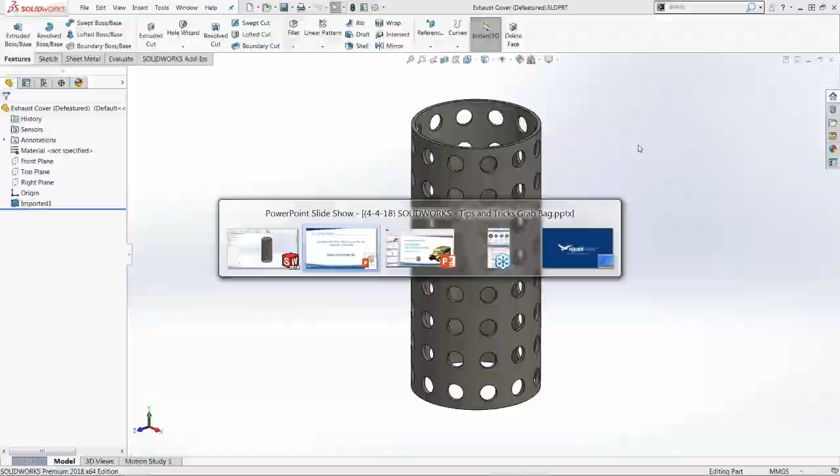Moving on, this is one of my favorite keyboard shortcuts. You can collapse your entire design tree with this clever keyboard shortcut. Some of you probably already know this. This is Shift-C, and this actually automates a command called collapse items. Especially in assemblies or very large design trees in general, you may come into a situation where you have a lot of expanded items and a very, very long design tree that you have to deal with. And what a hassle it is to have to come back through and manually close up all of those items.

If you right-click the top of the design tree, in this case the assembly icon, there's a collapse items option in the shortcut menu, and that's going to collapse your entire design tree. Quicker way to do this, in my opinion, if you like keyboard shortcuts like I do: hold Shift, press C, and that'll collapse your design tree and clean up that mess for you.

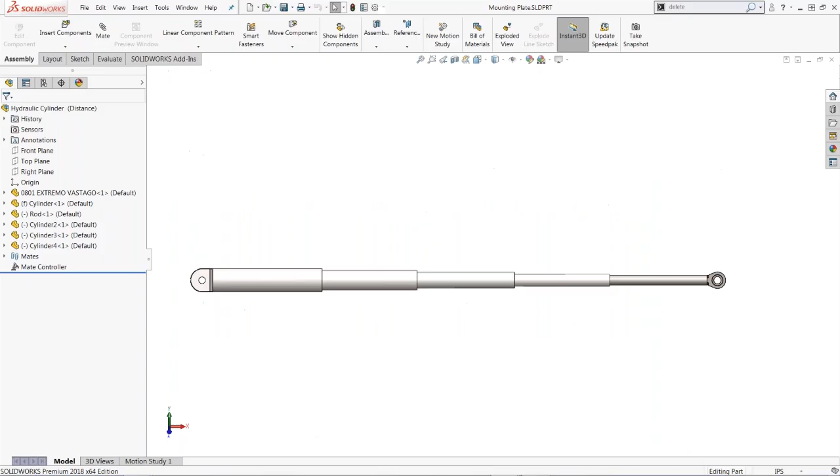Our next one, again one of my favorite shortcuts: configure to your heart's content with this powerful dialog, no Excel required. Many of you are probably already familiar with design tables. For those who don't prefer to use design tables, we have another way to do that, using the Modify Configurations dialog. Very easy to use, comes in a table format. We've got a simple example here to show how we can use this to create configurations very quickly.

Now, how do you typically create configurations? The manual way is to come over to the configuration manager, add a configuration, give it a name, and then start going through and customizing dimensions and suppressing features per configuration, which is fine if you only have a couple. But if you need multiple configurations and you need to create them very quickly, this is where the Modify Configurations dialog really comes in handy.

To access this, you can simply right-click a feature either in the design tree or the geometry in the graphics area, and rather than just modifying it, you can right-click and choose Configure Dimension or Configure Feature depending on the geometry you have selected. In this case, I've chosen to configure my 6-inch dimension there, and you can continue adding dimensions to this table. So I've got the height, we can get the width, the depth.

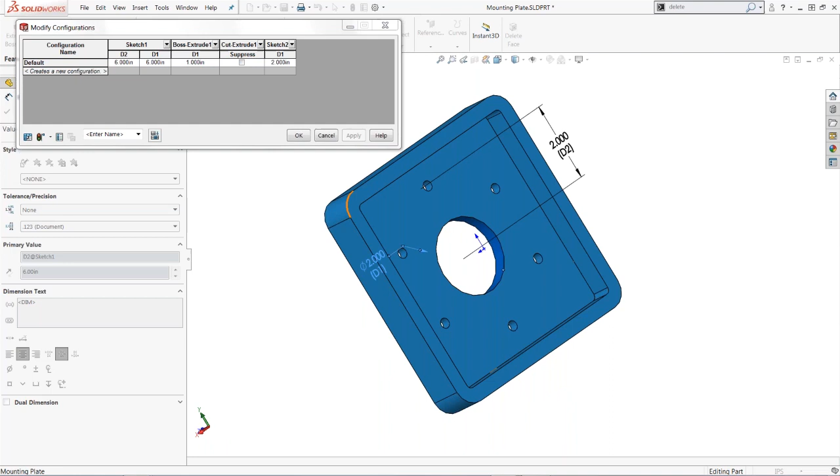You can grab additional features just by double clicking. You'll notice that comes in with a suppression state. Maybe we want to grab the size of this, we'll grab a fillet feature as well. And then you can just start configuring it.

Very easy to do. You can click where it says creates a new configuration very quickly. There's 3 additional configurations. Here's my 8x8 version with a 2-inch depth. And maybe we want to suppress, say, the fillets. We can do a 10x10. I think you get the idea here, so I won't spend a whole lot more time going through this.

Once you're done, you can click Apply. It'll generate those configurations, and you can also save this table for future reference by typing in a name and simply clicking Save. If you don't do this, this table disappears, so I always like to point this out. You can save that table view, and when I confirm, there's my number 1 configuration, a little bit larger with those fillets suppressed. Number 2, and 3, which I didn't change, so it's going to look the same as my default.

From the configuration manager, I can go to my table, double click that and open it back up and continue adding features, dimensions, and making adjustments as needed. So in my opinion, very underrated. If you're not using this and you don't like design tables, it's a really great way to create multiple configurations very quickly.

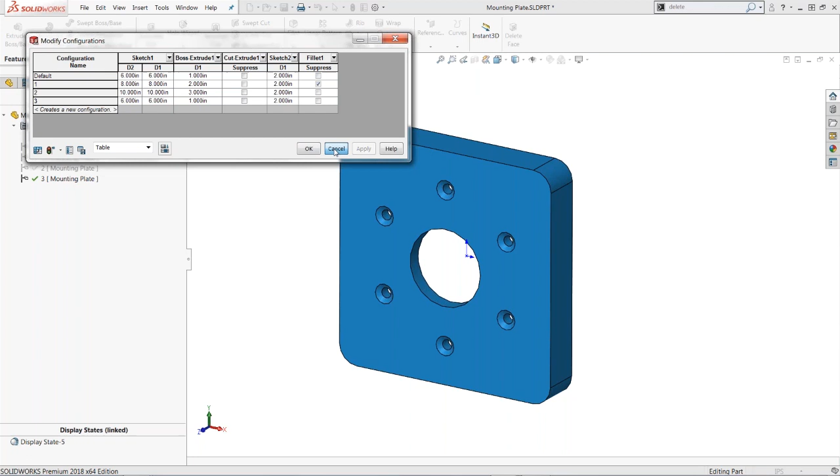If you've accidentally cleared your selections—and I think we've all done this—you go through all the trouble of making pre-selections, then you click in white space and clear your cursor.

You can bring them back with this context menu shortcut, known as Previous Selection, though there aren't many different ways to find it. As an example, if I make several selections here, maybe selecting a variety of faces and edges, getting ready to run a command, and say I've done this 50 times and accidentally click in white space—what do you do? Fortunately, if you right-click in the graphics area, in the context menu there's an icon called Previous Selection.

I've yet to find this command anywhere else. I'm not sure if it can be added to the command manager—I haven't been able to find it. But for all of you listeners out there, if anybody knows of another way to access this, please let me know. You can send us a question and let us know where to find this. As soon as I click this button, all of my selections are back, and you don't have to panic.

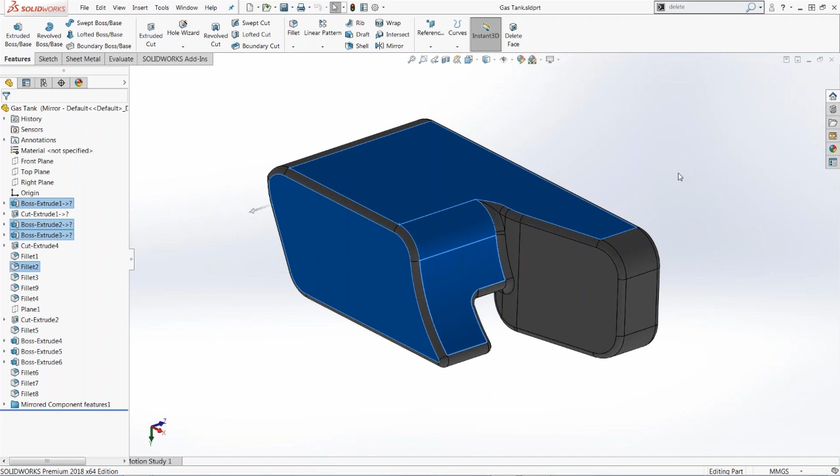So that's the previous selection tool that has saved me a lot of time through using it.

Last but not least, for our shortcuts, if you're tired of closing open files one by one, and you work with a lot of files at the same time like I do, you can close them all at once with this window command, known as Close All. In fact, I use this one so much I went ahead and assigned it to a hotkey.

Right now, if you take a quick look, I've got four documents open, and every time I click X, it's going to ask me if I want to save it—I'd have to do this four times. Instead, I can go right up to the Window dropdown and choose Close All, which I've assigned to a hotkey, and close them all down, that's it. It may come up with a dialog asking if you want to save, but it's only going to be one dialog, and you can take care of all of these at the same time.

So those are our time-saving shortcuts. That's going to take us into productivity settings—again, settings, whether system options or document properties, that I like to change with respect to what the default settings are for SolidWorks.

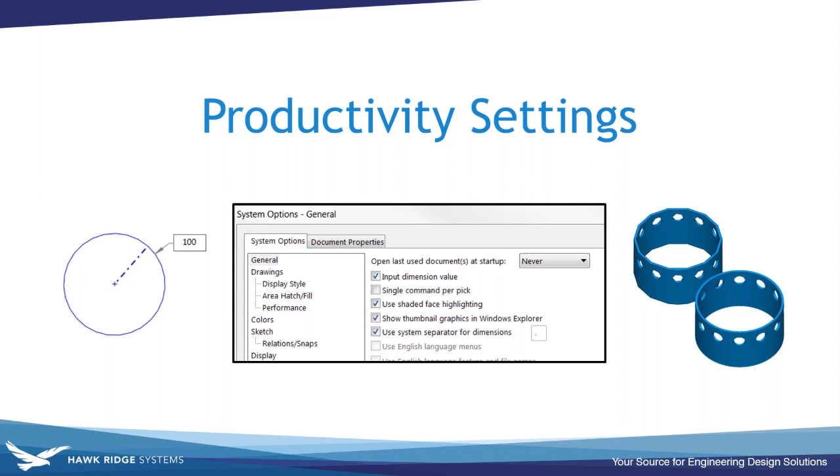Again, we have a couple hints on the screen here—we'll get right into the first one. You can enable this setting to add dimensions on the fly while creating sketches. Instead of having to go back every single time and grab your Smart Dimension tool, you can enable on-screen numeric input for your sketches in order to create those dimensions on the fly. Let's go take a look at this.

I'm in a sketch right now. If I go to create a circle, for example, I get a number attached to my cursor—everybody should be able to see that. But remember, this isn't a dimension, it's just the current value for this circle. So if I wanted to dimension this and fully define it, I'd have to come back, grab my Smart Dimension tool, apply the dimension, insert the value, and then confirm it. And that's kind of a pain.

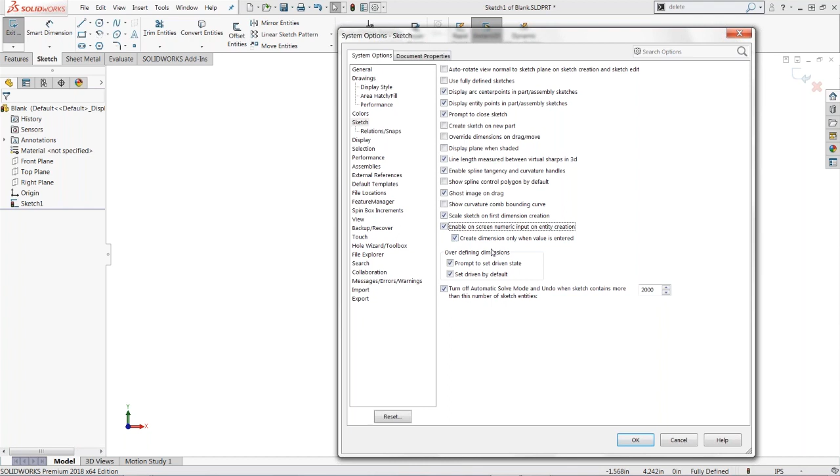So what I like to do is come up to my system options, go to the Sketch category, and look for 'enable on-screen numeric input on entity creation.' This gives you a little input box so you can add a value directly and apply a dimension automatically. If you're using this, you probably also want to make sure the sub-option 'create dimension only when value is entered' is enabled, otherwise you're going to be creating dimensions for everything, which isn't necessarily what you want.

With that enabled, when I go back and create my circle, notice I get my input box. I can just type in a value, press enter, and it assigns the dimension for me automatically, and we're fully defined there. So that's one of my very favorites, and I definitely wanted to share that one with you.

Moving on, you can enable this tool, there's a hint there for you, in order to prevent specified features from rebuilding. Some of you may have heard this. This is known as the freeze bar, and what it effectively does is it locks features and prevents them from being rebuilt. Now, when I say it locks features, you can always unlock them.

It doesn't prevent somebody from coming in and undoing that process, but it's a nice little tool. You'll notice it's taken me a little bit to load this file up, and that is actually intentional. What I have here is a wheel, and it's got a nice tread pattern on it, but that tread pattern takes a very long time to rebuild. In fact, if I go to my Evaluate tab here and check Performance Evaluation, our total rebuild time for this is nearly 45 seconds, and that's not something we want to deal with.

Now, assuming the rest of the work I'm going to be doing is with respect to something other than that tread pattern, I can come up to System Options, and in the General category, near the middle of the screen, you'll see Enable Freeze Bar. When I check this on and click OK, you'll find a yellow bar at the top of your Feature Manager design tree. Unlike the rollback bar, this one starts at the top and allows you to drag it down. And again, this is going to lock features.

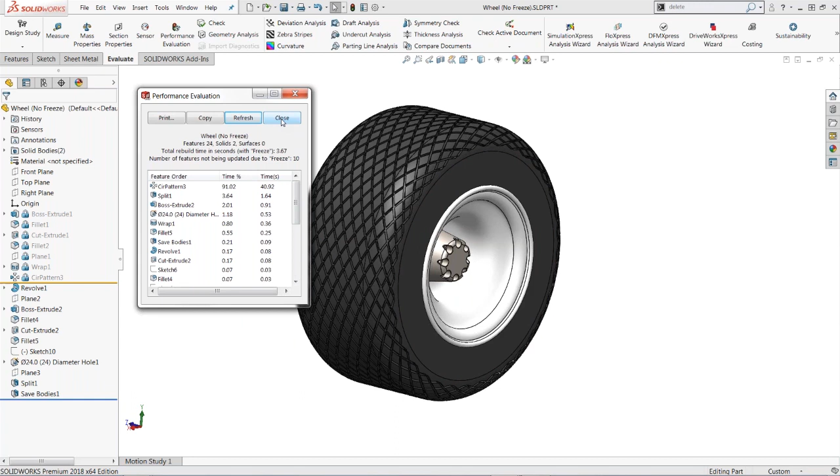Use this category of system options to add custom template folders, especially for you newer users out there. You need to be familiar with this. This is known as file locations. In this example, I'm going to take the simplest example of adding templates, but the truth is you can add a lot of other information using file locations.

If I start a new document right now, notice I have several tabs for templates. By default, you're probably only going to get 2 or 3 tabs here. But if you want to add new custom templates, you can use file locations. This is stored in system options as well, and you'll find file locations, a category about in the center of the list there.

By default, it's going to show you folders for document templates. But a quick look at this dropdown shows we have a ton of different types of items that we can add so the system can reference them properly. Things like weldment profiles, textures, thread profiles, you name it, it's probably in here. So in this case, I want to add a folder for document templates.

I'm going to go right to my file set here. The name of the folder that you add is going to be reflected in the new tab that gets created. So I'll choose my test templates and click OK.

One other thing, when you see this dialog, you're going to reflexively want to click yes. You don't actually have to do this. This just adds a search path so you can search for those documents later. And if you click no, it's still going to work. So you can go ahead and click no there.

Now when I go to create a new document, you'll notice my tab for test templates carrying over that folder name, and there they are. So this is the easiest way to add new templates and allow you to store all those document settings so you've got the proper standards and everything else you need.

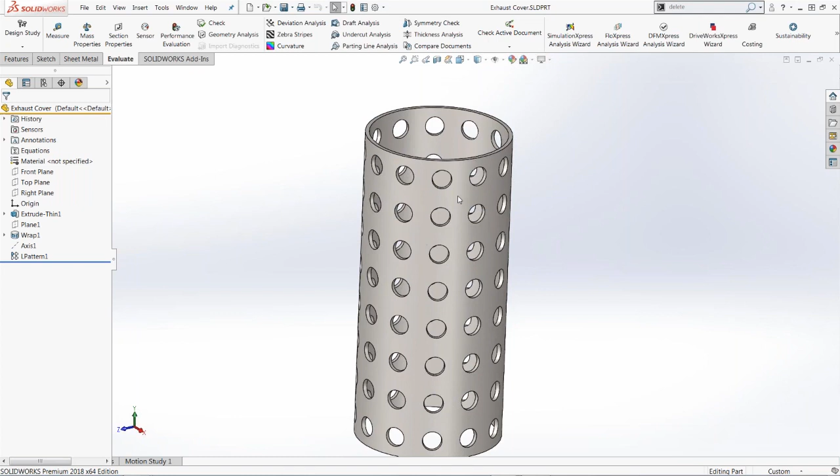We saw this in the very beginning, and right now you can see the fidelity of these edges is pretty nice, but let's say you're working on a slower PC, or you're getting some graphical issues. When you go to rotate this, it's kind of choppy, right? What you can do is, rather than system options, go to document properties. We have an image quality category, and we've got two sliders here, one for draft quality, one for high quality, for hidden lines removed and hidden lines visible.

If I reduce this, what you'll find when I click OK is that we're going to get some wacky looking edges there. Now these don't look very precise. Obviously you don't really want to work in this extreme of a case, but if you have a very slow PC, if you need faster graphical performance, you can reduce that slider. Maybe not quite this much, but that will improve your graphical performance quite a bit.

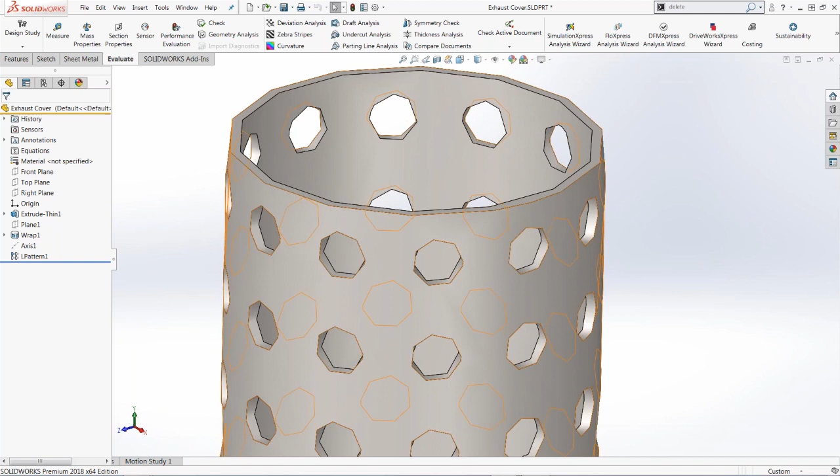And again, that can be saved in a template. So if you want to reduce that, you can. And again, that's image quality.

And then finally, for productivity settings, this 2017 option allows for the import of non-SOLIDWORKS files without translation. That without translation, that's the big deal here. This was introduced a couple years ago. It's called 3D Interconnect, and if you want to take advantage of it, you do have to make sure that it's enabled.

So this is just going to take a second. We've got a big assembly that we're going to load up here. And we're going to show how we can take, in this case, I used a step file, but you can also use CATIA, you can use Creo, we can use lots of third-party documents, and we can bring them in without the hassle of translation, which oftentimes, unfortunately, results in errors.

So I've got an assembly here, and I want to bring in a hydraulic cylinder to add underneath this truck bed here. And if I go to Insert Components, and I browse out, when you're doing this, by the way, make sure that you're not set to just SOLIDWORKS files down here in the bottom right. We want to make sure to set this to all files.

I'm looking for my hydraulic cylinder, and we're going to use the step file. And when I open this, it's just going to read it. And the coolest part about this is that if the model is updated in whatever program it was initially created, it can be updated here as well.

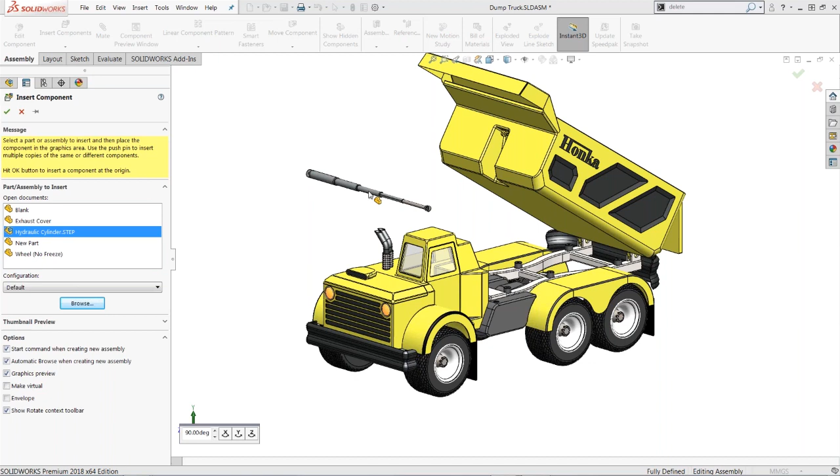There's a ton of documentation on 3D Interconnect. I'm not going to get into it too much here, but notice no translation. If you have a look in the Feature Manager design tree, there's a green arrow superimposed over the icon there. And that's what allows for a link back to the original program. All right, so just something I wanted to cover there.

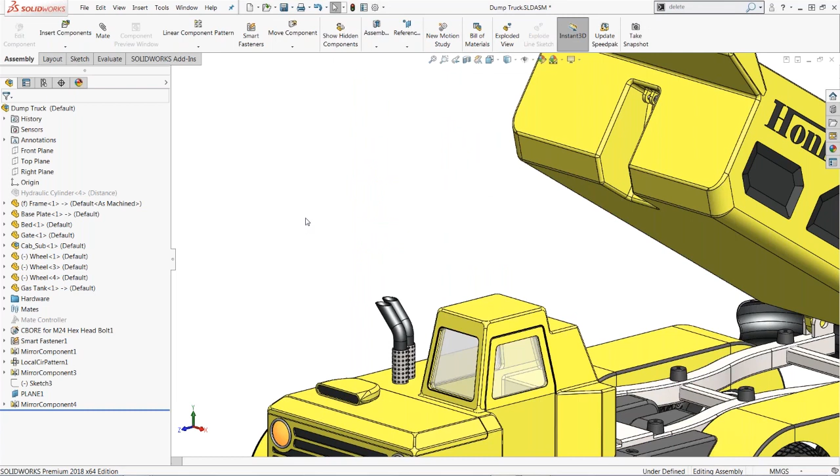In order to use 3D Interconnect, you do need to make sure that your options are set properly. In System Options, in the Import category near the bottom, you're going to find at the very top an option for Enable 3D Interconnect. You want to make sure that's turned on. And likewise, if you don't want to use 3D Interconnect, if you need that translation, you want to disable that. And this works for opening parts in assemblies or parts on their own as well.

All right, moving on to the next category, we've got power tools and utilities. Some of my favorite tools and SOLIDWORKS utilities that I consider to be relatively underused. Again, some hints on the screen here. The first one that we're going to take a look at, this is an assembly command. It's, I guess, technically an evaluation command, but it's used for assemblies.

And this color codes components to show mass, rebuild time, cost, you name it. There's a lot of different parameters that we can color code our assemblies by. Some of you will probably recognize this. This is assembly visualization. This is a really nice evaluation command that can do a lot of different things.

So from the Evaluate tab, we'll go to Assembly Visualization. By default, it's going to color code this according to mass. So we can immediately tell that our cab here is going to be the heaviest, closely followed by the frame, then the bed, and we can see that things like the base or the plate back here and some of these other subcomponents don't have nearly that much mass.

Now, you can change colors. You can move the sliders to make some adjustments there. But what I want to focus on here is the ability to show other categories. You can show things like density, volume, surface area, etc. But if you click more on that right-hand arrow, you can select from a variety of other properties.

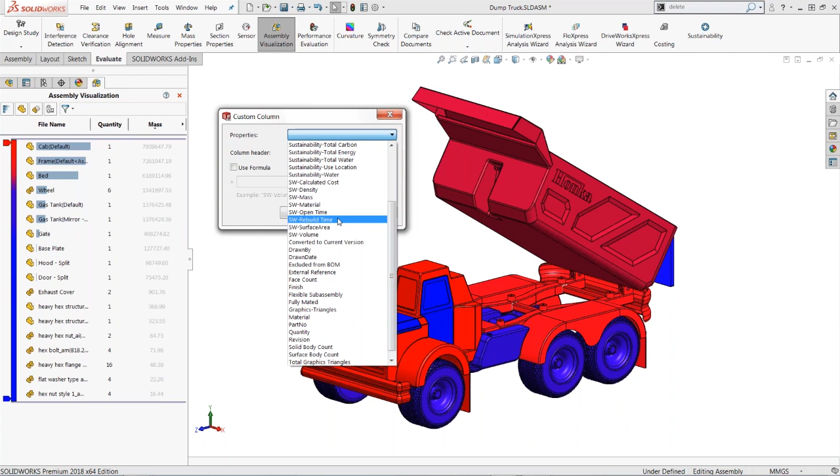Lots of sustainability options if any of you are doing sustainability analyses. But we also have things like open and rebuild time, in addition to things like whether your components have external references, whether they're fully mated, or if they have a high graphics triangle count. We can check out all of these, but the reason I emphasize open and rebuild time is because these can help you identify components that are slowing down the opening or the rebuilding of your assemblies.

So if we show rebuild time and I click OK, notice most of these things are actually not too bad, but those wheels, which we had to look at earlier, again, because I don't have those features frozen or suppressed, that's taken 44 seconds every time we want to rebuild it. So definitely a really valuable tool, helps you spot issues and inefficiency within your assemblies, and a very important tool to have in your tool belt there.

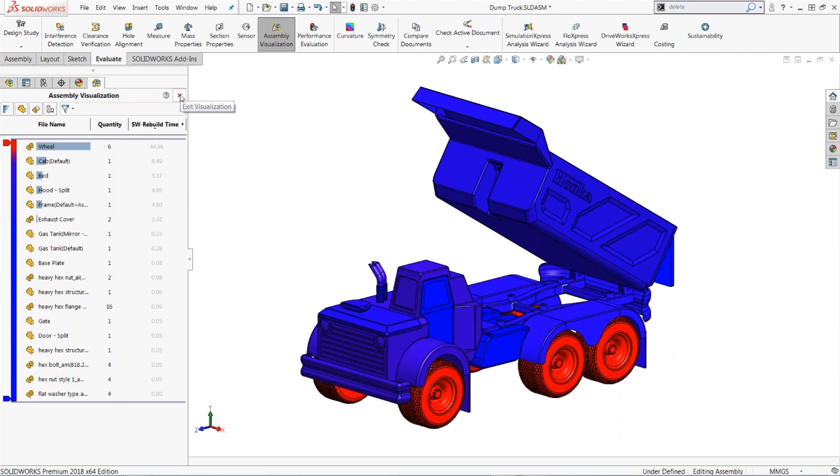All right, let's go ahead and close these down. We're going to move on to another section here using that close all command again. And you can use this tool to move, rotate, or scale an entire sketch even if it's underdefined. Again, very underrated. This is the modify sketch command. How many times have you tried to make an adjustment to a sketch or translate it only to find that it's partially underdefined and you end up messing up the sketch? That's what modify sketch is really good for.

To show this as an example, I'm going to make a quick copy of an existing sketch, put it onto our other plane here. We're going to go edit that sketch, and then from tools, we can go down to sketch tools, and here you'll find modify. Again, this might be a good example of where you could search for a command if you don't know where this lives. I'll click modify. We get a little dialog here.

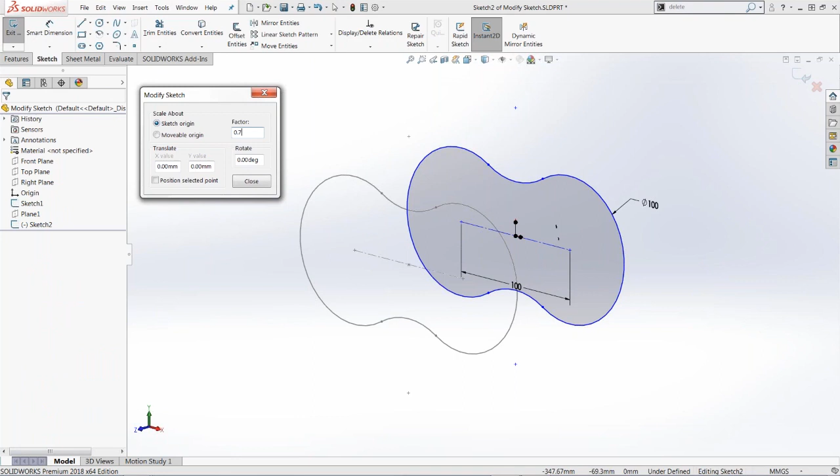We can scale it. So if I want to change the scale, for example, 0.75, make it a little bit smaller. We can rotate it. We can translate it. And keep in mind, this is an underdefined sketch. If I just tried to click and drag this, we'd run into all sorts of problems. So modify sketch, super valuable. And just to finish this off, why don't we make a quick loft for fun? We'll do something like that. All right, so very easy to use, very valuable.

Next up, this 2011 tool removes details from assemblies and parts, and this does include multi-bodies as well. This is known as the Defeature tool. Very useful for simplifying models to be used in assemblies, so you do have faster rebuild times and better performance, but it's also good for protecting things like intellectual property. So if I wanted to send this to someone, maybe to fit another component to it, but I didn't want them to see the bolt pattern for whatever reason, the Defeature tool can help here.

So from Tools, near the top, you'll find Defeature. This is going to end up splitting your screen, but for right now, it's just asking me what features I want to keep. So it's a multi-page dialog. You've got to make sure to click the next button. Choose features that are critical. You can select all holes, etc. When you're ready, go ahead and click Next.

This is where you'll see my screen split in half. It's going to show me the original on the left and the simplified version on the right. And you'll see in this case, it's gotten rid of all of those holes, all those extra details, because we probably don't need to see this in an assembly. All right, so we have a couple options here. You can identify additional items to be removed, or in this case, you can skip that. In some cases, if you're doing this at the assembly level and need to retain motion, you can identify information that needs to be kept for that.

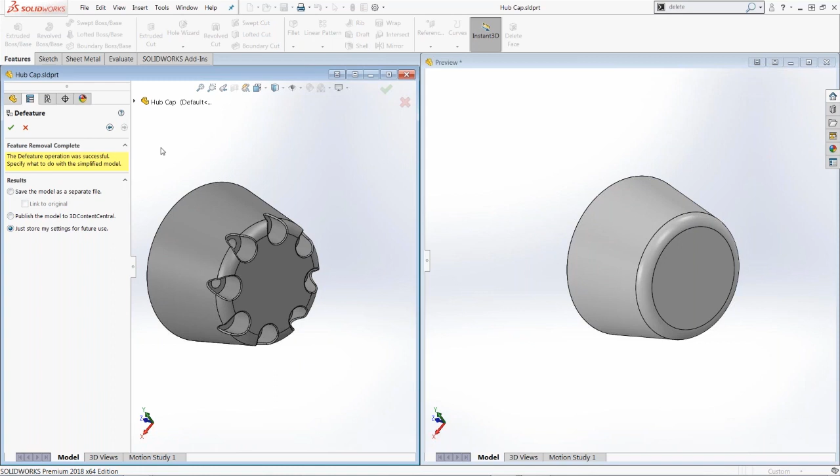And ultimately, when you're done, you have a couple different options. You can store the settings for future use. If you want to just use this later on, you can save this model as a separate file. This is typically what we do. And when you save this as a separate file, you can also choose to link that to the original. That way it actually maintains a link between those two documents. I'm not going to do that here, but you can see what our end result would look like. And of course, this would perform quite a bit better in the context of an assembly. So that is the Defeature command.

Next up, you can quickly locate small faces and short or sharp edges with this SOLIDWORKS utility. This one's kind of hidden. I don't see this being used a lot, and I really feel like it should be. This is known as geometry analysis. And it does exactly what I just mentioned there. It's going to allow you to quickly identify faces and edges that are small, and this is typically an issue

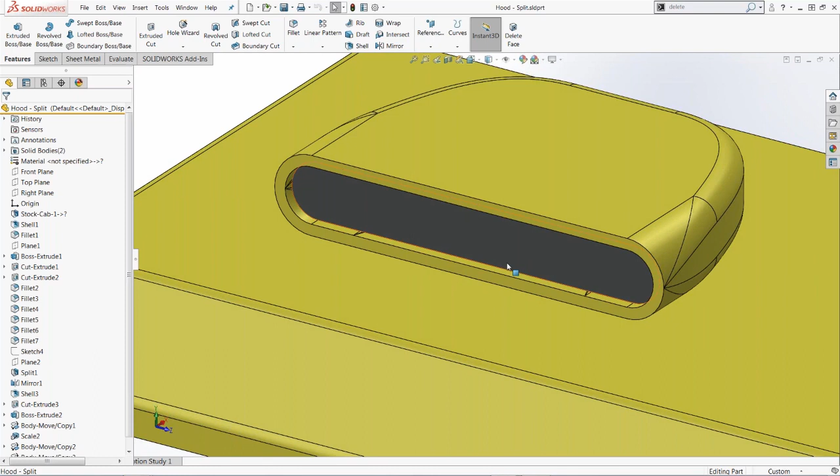for manufacturing. Now, if I zoom into this hood that we have here, there are quite a few that you can spot, but there are going to be some that are hidden as well. So in order to make this easier, from the Evaluate tab, choose Geometry Analysis. Here you would set your parameters to identify what constitutes a small face or a small edge. Once you have those set, simply click Calculate.

It's going to go through all your geometry, and it's going to find all those edges, faces, and vertices that could end up being an issue of some sort. So for short edges, it looks like I have a couple. If I rotate this around, yeah, that's a short edge. That's going to be kind of a problem there. All right, if anything, it's going to make modeling a little bit more difficult.

We can go look for some sliver faces. There's another example. If I zoom in here, and of course those callouts are going to draw you right to them, so you don't have to go searching. I find this ends up happening most commonly when you combine separate multi-bodies into a single body, but it can really happen anywhere. And we've got a couple other pieces here too that we may be concerned with.

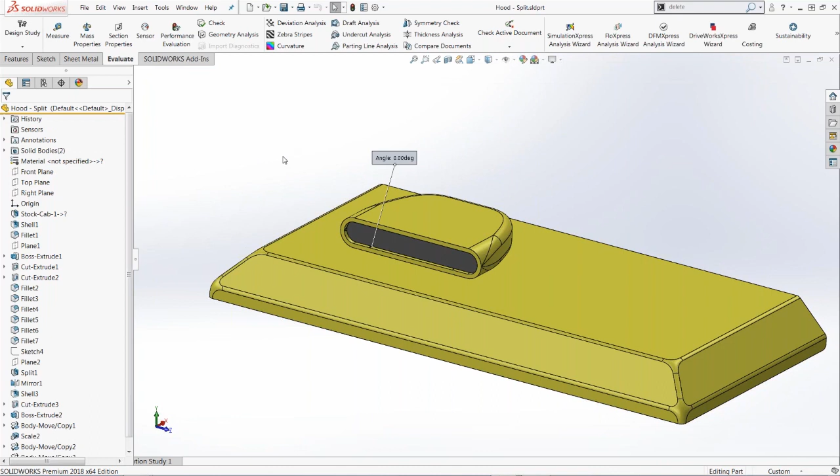So that's geometry analysis. Again, kind of underused, and I think it goes a long way to helping you identify areas in your models that may be somewhat of an issue.

Moving forward, you can use this tool to create a continuous spline from lines and arcs. Smooth out those transitions. A lot of times I see people struggling with transitions, and that's where the fit spline command can really come in handy. So let's take a look at this. We're back to our wheel. This is my simplified version, so it loads a little bit more quickly. And notice all the edges that we have in the wheel.

Now these are tangent edges, so they're technically continuous, yes, but they're not curvature continuous. And you can see this if you have a look at the curvature evaluation tool. You can see they're very distinct colors. There's no real transition between them. And in some cases, especially with consumer products, this can be an issue. So one way we like to take care of this is through the use of a fit spline.

If I go find sketch 6 here, which controls all of that internal geometry, and I edit this, I just went normal to it there real quick. We can take all of this analytical geometry, that being our lines, our arcs, and we can create a fit spline from this. From the Tools drop down, you want to look in Spline Tools specifically, and you'll see I don't have any splines in this sketch yet, so I don't have any other sketch spline tools to work with, but I do have a fit spline.

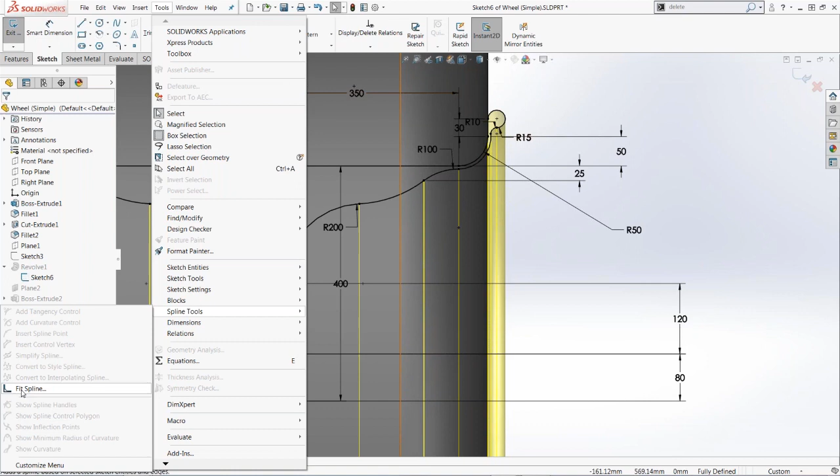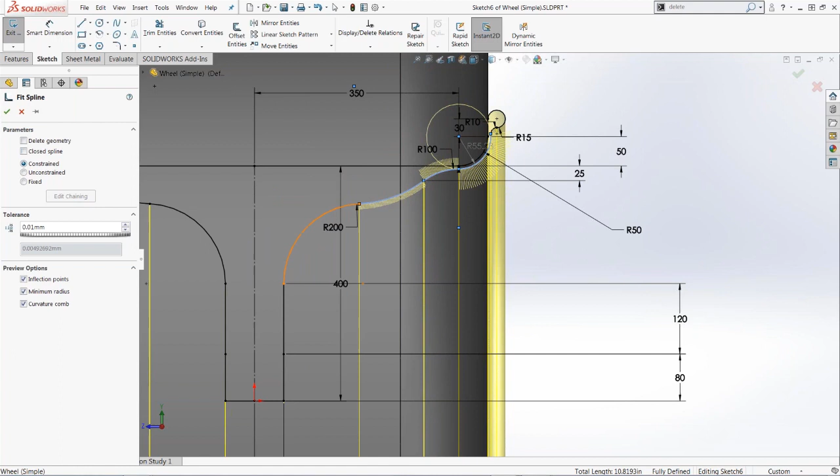Now this is kind of an interesting command. It doesn't have any window for you to input selections, so you just have to trust that it's keeping track of those. And I'm just going to start making my selections. Now you'll see kind of a weird pink line there on the screen. It's by default going to try to create a closed spline more than likely. In our case, we don't need that to be closed. We can keep it open. And we're just going to choose a few additional pieces here.

You can choose whether it's constrained to the original geometry. Do you want to delete the original geometry? I prefer to keep the original geometry in case I ever need to change it. But if you wanted to delete it, you could. You can adjust your tolerance. And once you find a fit that you like, go ahead and click OK, and it's going to replace all those lines and arcs with one nice continuous spline.

And what this ultimately results in is nice, smooth, blended curvature. And if we investigate that again through the use of our curvature analysis, you can now see gradients in the colors. All right, so a nice smooth transition that we don't get if we just have tangency between lines and arcs. So that is your fit spline command. Definitely a good one to be aware of.

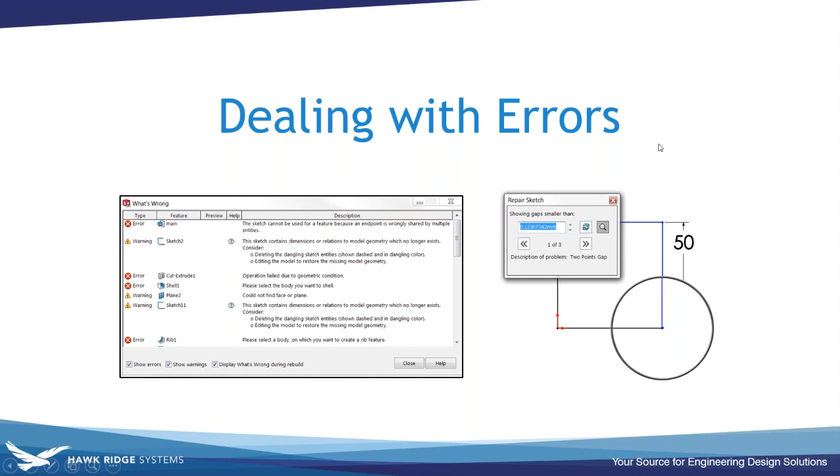All right, moving on, we are going to address dealing with errors, something that everybody has had to deal with at one time or another. This is going to be a fairly basic overview of some tips and tricks, especially valuable to you newer users out there. We're going to start off by learning where to resolve errors in a part.

You want to start with this feature in the design tree. All right, and this is just the very first one. Whichever one comes first in the design tree, that's where you want to start. And right now, you can see when I open up this part, there's nothing on the screen. There's no geometry whatsoever because we have so many errors.

Now think about this. If I try to come to the bottom of the tree, which is where a lot of people like to try to start fixing errors, what feature do I have here? I have a fillet, right? That fillet has to be applied to some sort of existing geometry. So if I try to fix the fillet first, there's no way that that can happen. You need to start at the very top of the tree, right below the origin. Whatever feature has an error first, that's where you want to start.

All right, and then moving on from here, this dialog becomes very important. This provides warning and error information for either a specific feature, or it can give you information for an entire file. This is the What's Wrong dialog. The reason I bring this up, everybody's probably seen it, but it's very easy to just dismiss. If I right click the top level part here, from the shortcut menu, I have What's Wrong. If you do this at the top level, you're going to get information for every error and warning in the entire part.

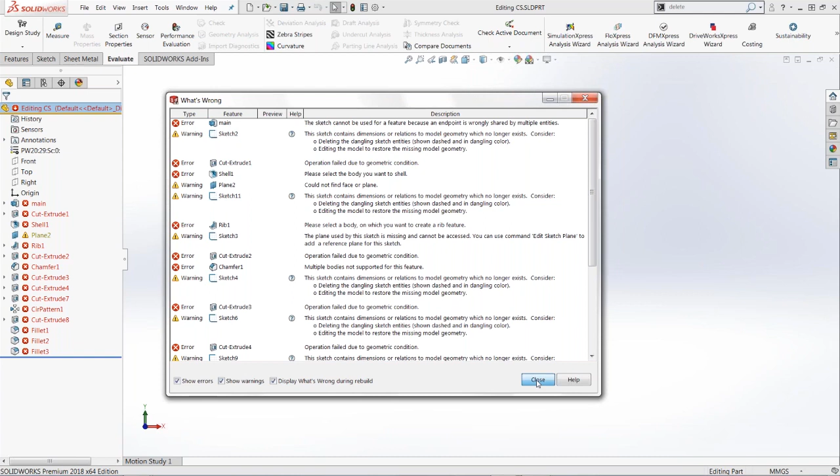And again, this is a lot of information. We can take this a step at a time, but it's important to understand what's going on here. It's easy to just click close and try to fix it yourself, but I can immediately see with the very first feature that this sketch can't be used. So I know just by looking at this What's Wrong dialog, there might not be anything wrong with that main feature. It looks like it's actually going to be an issue with the sketch. You can also get this when you rebuild. Sometimes you'll see that come up.

And if you want to see what's wrong for individual features, you can just hover over them in the design tree, or you can right click and choose What's Wrong. And it's going to give you a good description and help you understand where to start. So that's the What's Wrong dialog.

And then building off of that, this tool allows you to check for what I call micro lines, extremely small lines, and tiny gaps within a sketch. This is one of the most common errors that we have to deal with, is very small accidental lines, little gaps that create discontinuity and prevent you from creating your feature or result in errors. This is the Repair Sketch tool.

So coming back to our same issue here, if I want to get started fixing this, we already know from our What's Wrong dialog that there's an issue with the sketch of the main feature. So if we go to edit this, I don't really see anything wrong with this. And that's the problem. These are very difficult to identify just by looking. So that's where the Repair Sketch tool really comes in handy.

From Tools, if we go to Sketch Tools, we have a Repair Sketch command. And as soon as I do this, we're going to get a little dialog that's going to provide us with a magnifying glass and allow us to search for those errors. So you can set this to show gaps smaller than a certain threshold. And then I can zoom in with just this little magnifying glass, and you can see this tiny little issue is enough for our entire feature to fail.

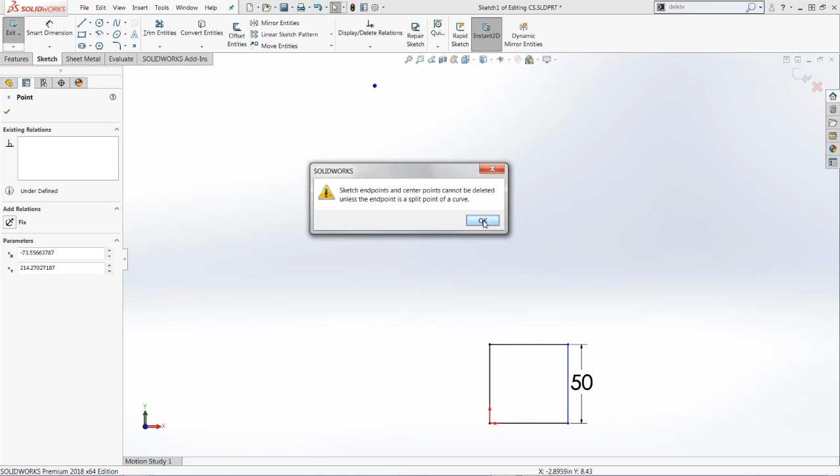I'm going to zoom into this. Hopefully everybody can see this okay. And when I get in close enough, what do we have here but the world's smallest line? If you're zoomed out, you're going to end up clicking an endpoint which can't be deleted. But when you zoom in close enough, or if you do a box select, for example, over that, you can delete it no problem. All right, and that's going to take care of that issue for us.

If we want, we can throw on an equal relation here to fully define that. And we do have other errors, which I would typically recommend stopping and repairing. You'll get another what's wrong dialog, but you can see that that first feature now has no issues. All right, the warning symbol is gone, and that repair sketch tool is a really great way to identify those issues at the sketch level, which are often the cause of your features failing.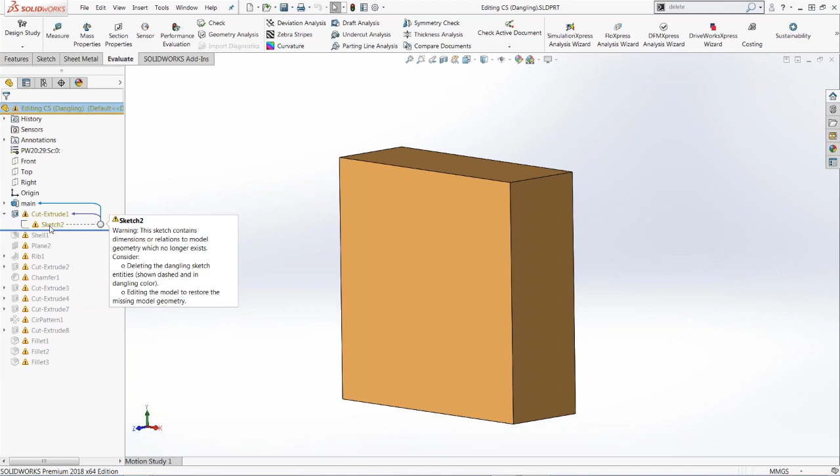Playing off of this again, this is another type of reference that represents what I would consider one of the most common error types. This is dangling references. Okay, what is a dangling reference? This means that the reference exists, but SOLIDWORKS doesn't actually know what it applies to. And if I go hover over my cut extrude, that doesn't really tell us a lot. But if I hover over the sketch, which also has an error, you'll see this sketch contains dimensions or relations to model geometry which no longer exist. When you see this, this essentially means that there is a dangling relation.

Okay, so let's go investigate that. A quick look into the sketch. You're going to see by default, it's difficult to see with the preview that we have here, but it's kind of a brownish yellow color of the sketch segment at the top, which I've highlighted in orange now. This is a dangling relation. It exists, but it doesn't know what it belongs to. So one quick way to identify this is through colors. You can also use display/delete relations, and you can use the drop down to show dangling relations.

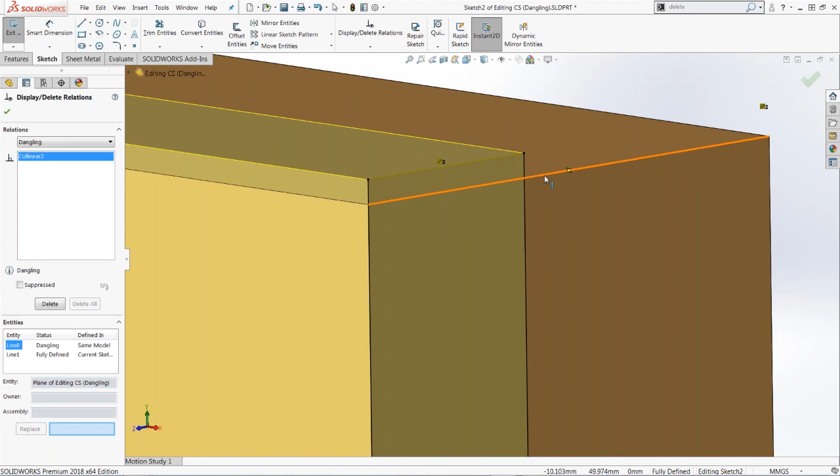You can also replace entities here. So I can take my dangling line 8, and if I click it, I can choose an edge that I want this to apply to. This is a collinear relation, and I want it to apply to the edge that we see at the top. So once I click that, I can choose replace, and it'll go ahead and fix that for me.

Instead, what I typically like to do is click the sketch segment that is having the dangling issue, and then you'll notice a red handle attached to it. If you click and drag this, it's going to allow you to reattach this relation. So you'll click and drag that red handle, drop it onto the edge that you want it to be assigned to, and it'll snap into place and take care of that relation for you.

Now you can see that sketch entity is black. All right, so that'll take care of that. Exit the sketch, and there's your feature. Okay, so that's dangling relations. You always want to take care of those, and that's a good way to do that.

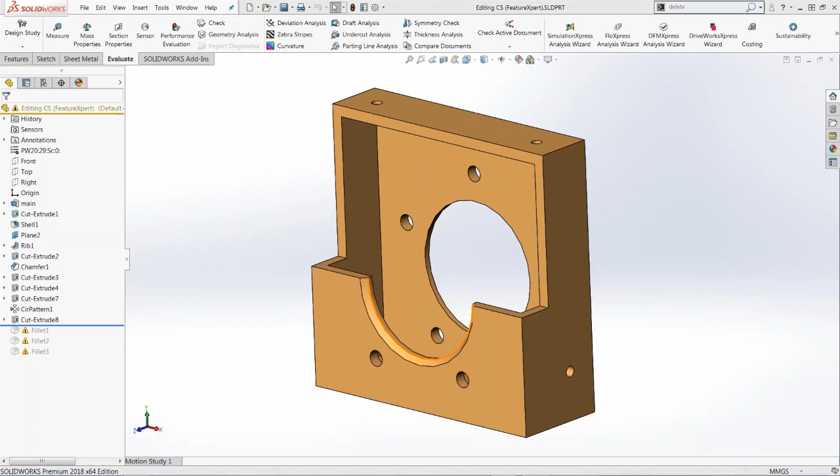All right, and this expert tool can automatically fix certain fillet and draft errors. And this is just a disclaimer, this is about a 50-50 shot, okay? This is known as the FeatureXpert. It does not always work, so don't put 100% faith into it, but it can be a nice tool, especially when it does work, of course. At the very end of this model, we have a few fillet features that are struggling. And so we want to try to take care of those.

If I roll to the end here, it's going to give us that error. We can stop and repair them. And in the what's wrong dialog, what you'll find is yellow, first of all. And that's an indicator that you can use the FeatureXpert, and then a new FeatureXpert button. This is pretty much a click and pray type of situation. You're going to click the FeatureXpert. It's going to do its thing.

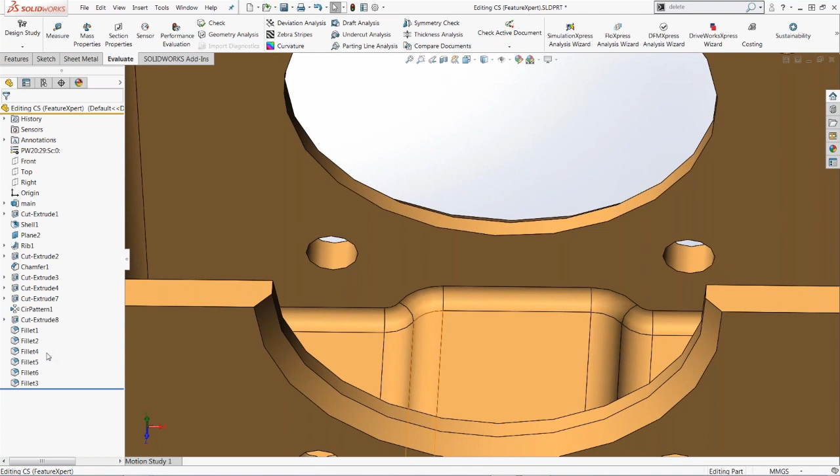And what you'll find is that it's going to break up fillets and rearrange them in the order. And it's actually going to create additional fillet features here, but it's going to do its best to preserve the original intended geometry. So you can see we got some good results here, but it does change up our tree a little bit. We now have 6 fillets instead of 3. They're reorganized, so they're in a different order. But when this does work, it's a very helpful tool, and I definitely wanted to include that here.

Now, I just saw a question come in about dynamic reference visualization arrows. This is a great question, I'm glad that it was asked.

For those who haven't heard of this, as I hover over features in the design tree, I get blue arrows and purple arrows. The blue arrows are the parents of whatever feature I'm hovering over, meaning this Cut Extrude 2 feature can't exist without the main feature and Cut Extrude 1. Likewise, the purple arrows indicate children, which is the opposite relationship.

If you want to turn these on, there's a couple ways to do it, but my favorite is to simply right-click the top level icon. From the context menu specifically, you'll find dynamic reference visualization for parent and child at the same time. You want to control those individually—you can have one on, the other on, or both. I love to keep these on.

It's a really great way to understand the relationships between all of those features, so it's really good for dealing with errors and things like that. Great question, very appropriate for this section.

And with that, we will move on to improving assembly performance. Again, one of the most often asked questions of our tech support is how do I make my assemblies faster? So we've got some options there.

For faster performance, avoid using components that are hosted on a network server, since you have to ping another server—that's naturally going to slow things down. I don't have anything to show for this, but the idea is you don't want to be using components hosted remotely. If you can use files that are stored locally, that's going to be best for you.

Next up, this mode for subassemblies lets you show their motion, which is great, but you need to use it with discretion. This is known as making a subassembly flexible. A flexible subassembly allows the internal motion of a subassembly to be shown, which is really good, especially if you need to do motion analysis or simulation that includes motion with a top-level assembly. But it does slow down the system.

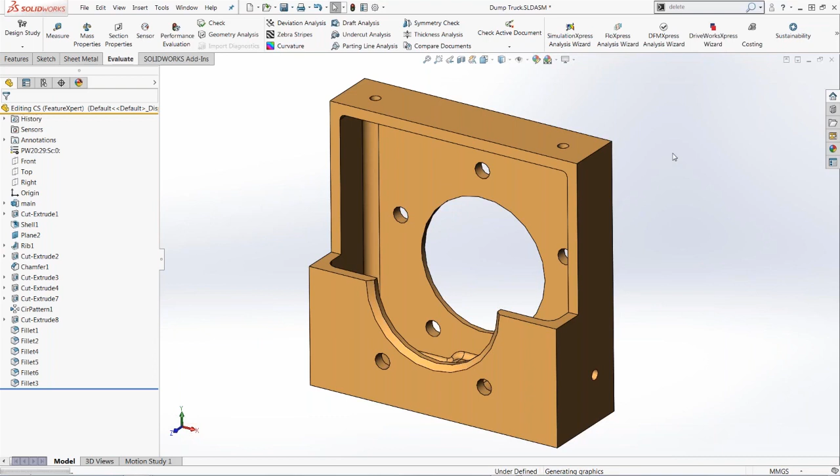So we're opening up that dump truck again—should take just a second here. What you'll find is that by default, my cab subassembly here, which has a few components, I can't move any of these. If I click them and drag them, they're fixed.

But the hood and the door, we want to be able to show the motion there. So in order to do that, I can right-click my cab subassembly, and then from the context menu you should see Make Subassembly Flexible. If you don't see that, you can add it, or go to Component Properties—there's an option in there.

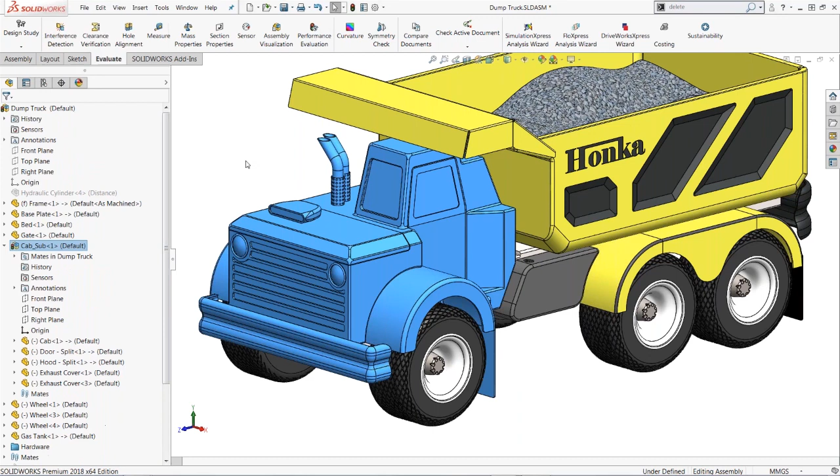But as soon as I make the subassembly flexible, I can now take these components and drag them up—there's the hood, there's the door, right? And I was always able to move the bed, but that's just because this is one single component. So keep that in mind as well.

This is great, but you want to use them with discretion because they do have a tendency to tax the system. Let's close all of these out.

We'll move on to our next one here. This mode for assemblies invokes a special set of system options for faster performance. We have special modes that allow us to get more out of our assemblies.

The one that I want to introduce first is large assembly mode. Typically, this can be activated after you have an assembly open, but it doesn't do quite as much because the assembly is already open.

I'm starting out with just a blank document here, and when you go to open that dump truck file, in my case, before I click open, I can change my mode from resolved, which is your default, to large assembly mode, and then click open.

What you'll find here is that this is going to load up pretty quickly, certainly faster than it did in the resolved case. In this case, we're looking at maybe 10 seconds or so. It's taking just a second here.

You'll find some things look a little bit different. First of all, it doesn't show any model edges, so it's going to get rid of those by default. That speeds up the graphics a bit. And if we have a look, all of our components have been loaded lightweight, so they don't show the individual features.

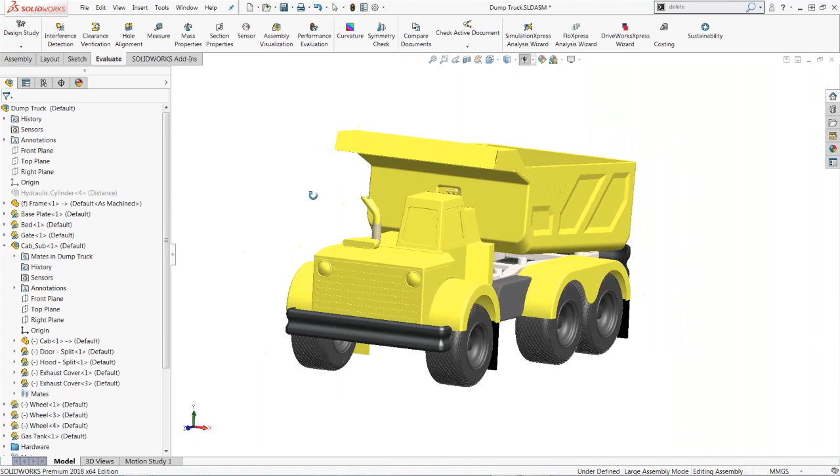One other thing I want to point out is that in the system options, if you go to assemblies, you can automatically trigger large assembly mode in order to improve performance based on how many components the design has. By default, it's going to be 500. So if you have a slower computer, for example, you may want to set this to 100 so that once you hit that component threshold, it's automatically triggering large assembly mode.

If that's not enough, and sometimes, especially with extremely large designs, it may not be, or maybe you don't really want to do much, maybe you just want to take a look at your very large assembly, or maybe you want to take measurements, things like that, we then have large design review. This goes the extra mile and makes this process even faster, but naturally there is a trade-off. So when you do this, you really can't do a whole lot.

There's our dump truck again. This time we're going to change our mode to large design review. Like large assembly mode, you have an option to automatically trigger this. The default is 5,000 components to give you an idea of how large these designs typically are. When you go to open this, you'll get a splash screen telling you what you can do, and that's pretty much it. So when I click OK, it's going to take a second, maybe, and there's our large design review.

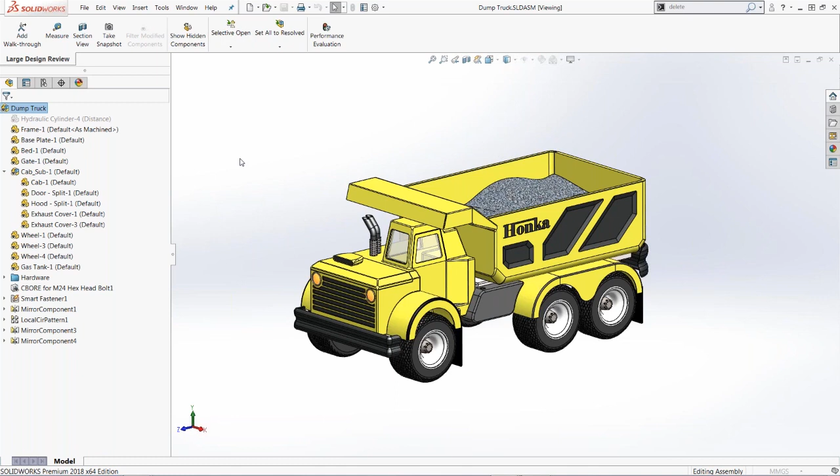Again, you see some graphical differences when I go to rotate this, but the thing here that you'll notice, there's no geometry, no information at all. We can just see essentially the structure of our assembly. You can still do things like take measurements. They are approximate, so you may get a warning there. You can take snapshots, things like that.

And then the one other thing I always like to mention, if you don't have the constituent components of this assembly, you can actually still open it with just the top level assembly file, only in large design review mode. So sometimes that can save you as well.

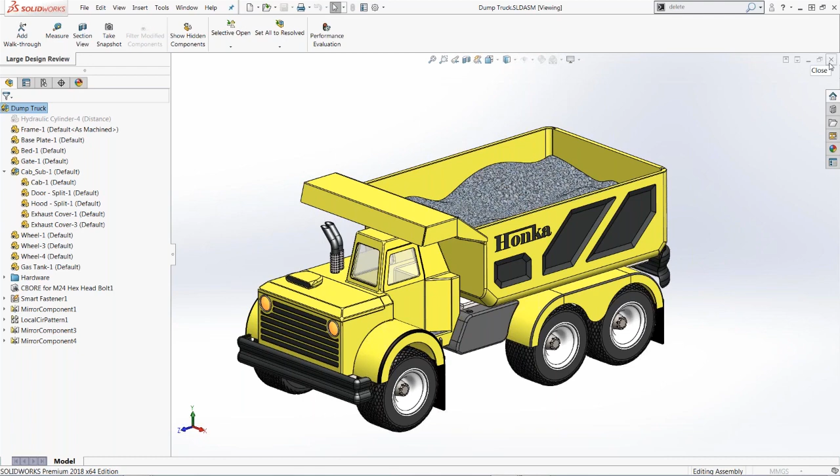Okay, and last but certainly not least, you can use this option while opening an assembly to create a new super simple configuration. This is known as the advanced configuration mode. Not super widely known. When I go to open, we're going to do the same file again. If I change my configurations, I have a couple configurations that I have here, but if you click advanced, you get some interesting options here. So you choose advanced and click open.

You get configure document as a dialog, and then you can choose to either create or open the currently selected configuration. Kind of pointless if you're using advanced open, but you can also create a new configuration showing all the reference models, or just the assembly structure only, which will just load everything suppressed. You can give that a configuration name, or you can use specified configurations for part references when it's available.

This one's the most interesting to me. If I check this on, and all the components that I use in my top level have a configuration called simplified, it'll automatically build a new configuration at the top level that represents all the simplified configurations of every component. This can save you a ton of time. For example, when I took the tread off of my wheel, that might be my simplified configuration. So this is very powerful.

Just to give you an idea of what the new configuration showing the assembly structure is, we can show that real quick. It'll create a new configuration. As I said, everything's suppressed. It's stored as a new configuration, which I called structure, but this can give you a good idea of what components are built into this dump truck assembly.

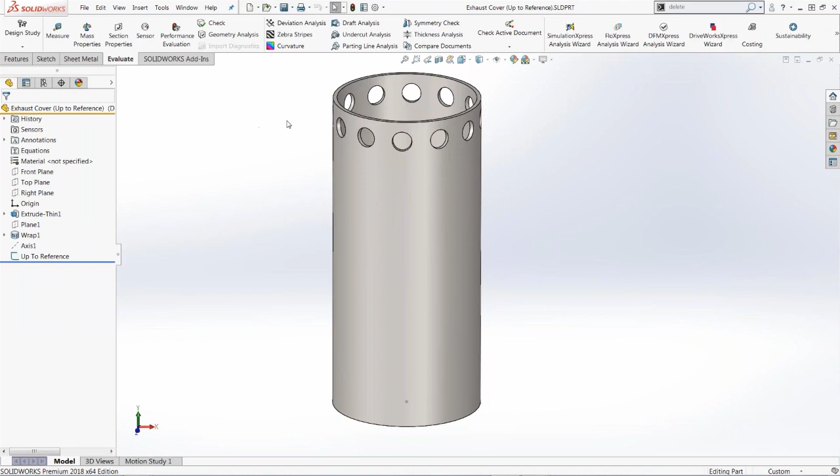Back to our exhaust cover here that we've seen a couple times. When I was building this, I wanted to make sure this pattern of holes went all the way down to the bottom, but I wanted the flexibility to change that later without losing that number of instances. Or, on the other hand, I could change this to retain the same number of instances but have them space out evenly.

From the linear pattern command, once you choose your direction, in this case our top plane, rather than spacing and instances, which it defaults to—that's great, but it doesn't allow you the flexibility of up to reference—we can choose up to reference.

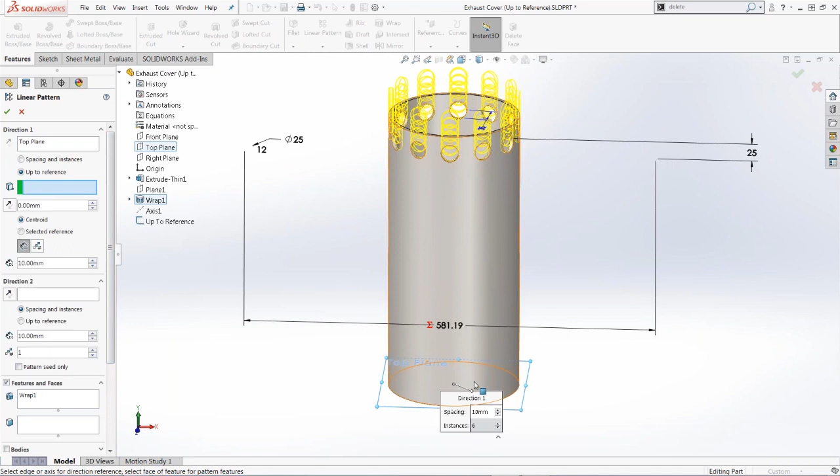Let's get our features loaded up here. Rather than just controlling the spacing and number of instances—maybe you don't know them, maybe you want more flexibility—you essentially assign a point or reference at which you want the pattern to stop. As soon as I click that reference, it goes all the way down to the bottom and then stops automatically. Then I can just control the spacing.

What you'll see, especially when we increase our spacing a bit more, is as I increase my spacing, it spaces those out, and then as soon as it gets past that threshold, it removes that instance. So it automatically calculates the spacing.

But we could go the other direction too—maybe I have a specified number of instances I want to use. Now you may need to use an offset here; in this case I need to offset just a little bit. There's 4 instances. As I increase this to 5, it changes the spacing.

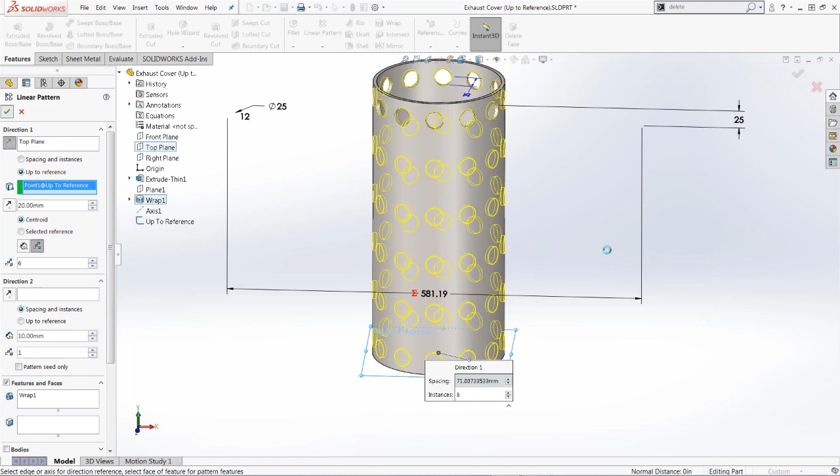There's 6, right? And the coolest part is, once I create this pattern, it builds that intelligence right into the model. So if I increase the size of my cylinder, for example, it retains that same number of instances and automatically changes the spacing for us. You can also go the opposite direction if you want to retain the spacing and add additional instances. This is something I see a lot, and it's really, really powerful.

I had a question come in about this: with that up to reference in the patterns, have you had issues where you have all the correct info needed, but it bunches the holes into a small space? Even if it's an endpoint of a sketch, sometimes it doesn't go to the end.

What I will say—Pat, thank you for the question, by the way—that's a good question. I would definitely make sure that the property manager is filled out, I know that's a generic answer. If everything's being bunched up into a small space, that would indicate to me there's an issue with the geometry you're using to represent the threshold, or it could be an issue with using a selected reference rather than a centroid.

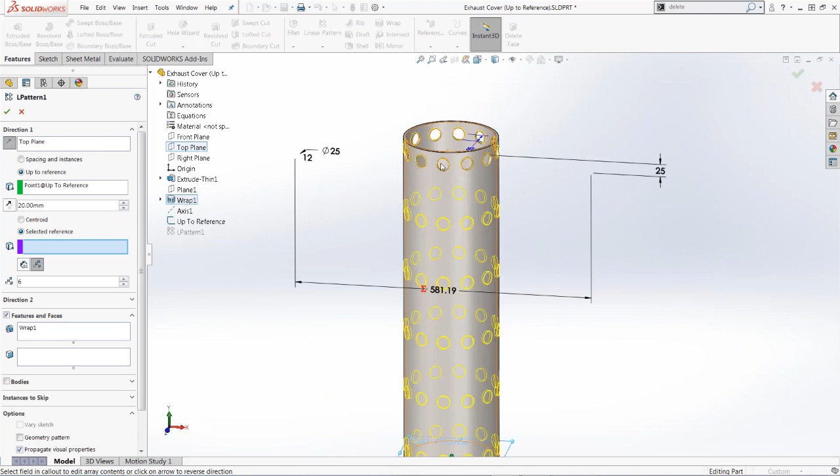One thing I see sometimes, if it doesn't go all the way to the end, you may need to use a selected reference on your feature, which I can't really do with a circle, so this isn't a great example. But sometimes the circle will bleed over a little bit, and that selected reference may help combined with the offset there. I'd have to see a specific example, but try messing around with your up to reference, your green and purple boxes, your selected reference, and hopefully that will help a bit.

All right, moving on, our next command. This is a sketch command that creates an identical linked copy of an existing sketch—super underrated. This is known as the derived sketch, and it is not the same as a copied sketch. Let's take a look at an example.

First, we'll copy the sketch. All right, so here's sketch 2. We're going to take that sketch 2 and paste it on a plane. Now, if I take the original sketch and click it, drag it, resize it, rotate it, the second sketch that I copied doesn't care.

It doesn't change at all. There is no relationship built into this. On the other hand, if I create a derived sketch, it's always going to look exactly the same as the original sketch.

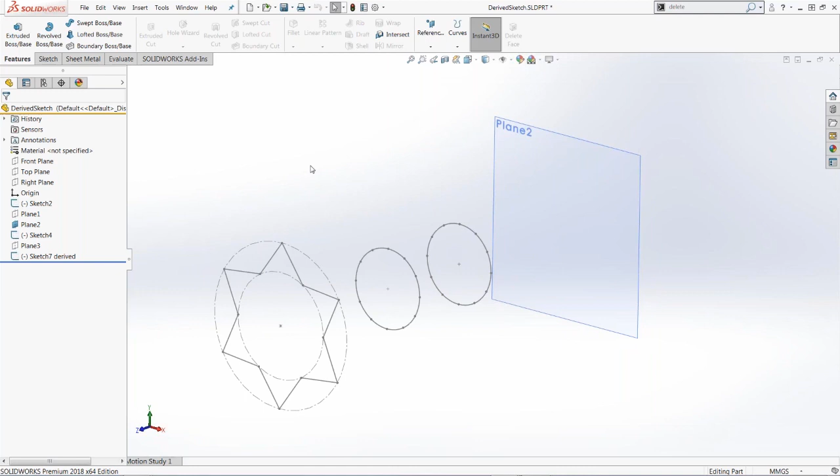The tricky part is knowing how to actually create the derived sketch. The way to do this is by selecting the sketch itself and the destination plane, using a control select to get both. Then go to Insert and then Derived Sketch. This is the only way to do it.

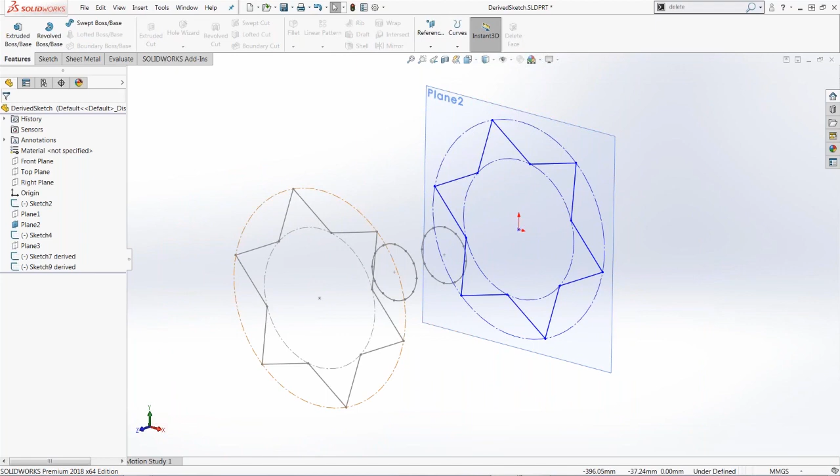What you'll find is that when I make an adjustment to the original, rotating or resizing it, the child sketch, or derived sketch, will respond accordingly. So this allows you to build good intelligence in here.

I really like this. We see a lot of people in aerospace using it too, for things like airfoils. Super valuable in loft and boundary features as well. So that is a derived sketch.

Next up, this command allows you to combine existing edges, sketches, or curves into one continuous curve. Super useful. This is the composite curve, so it's a curve type feature. It can take 3D sketches, curves, and edges, and combine them all into one entity. This is important because, for example, if we started a sweep here, and get a circular profile set up, I have only one option.

I can do either the 3D sketch or the curve, and in fact I can only use one of the two curves blended together here. Even with the selection manager, it doesn't help when you have different types of entities.

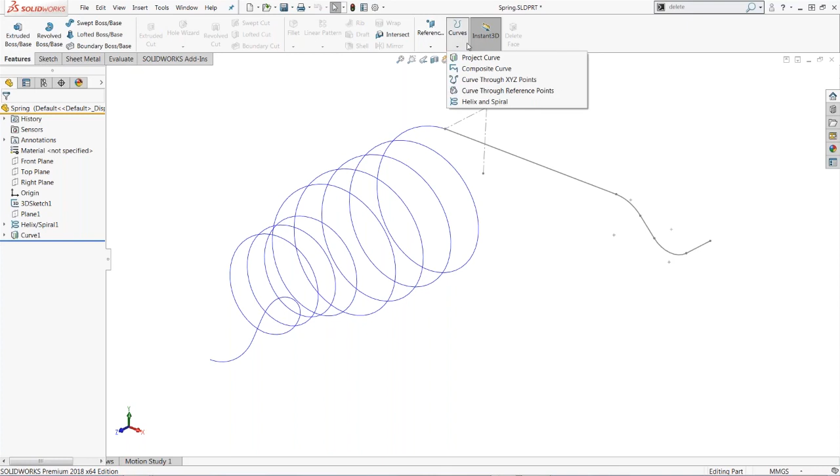So what the composite curve will do, and this is a feature, by the way, not a sketch tool, you go under Curves, Composite Curve, and just choose entities to join. I can do a quick box select of all of them, or in this case select them individually. There are all three of those curves, and it builds one curve out of it.

Now when I go back and create my sweep, I have no problem. I can choose the entire path and we get a result that looks something like this. Now, just as a side note, you'll notice we have some transition issues.

If you needed to take care of this, you can also convert curves back into 3D sketch geometry, and then use a fit spline on that in order to smooth out that transition. So just a side note there.

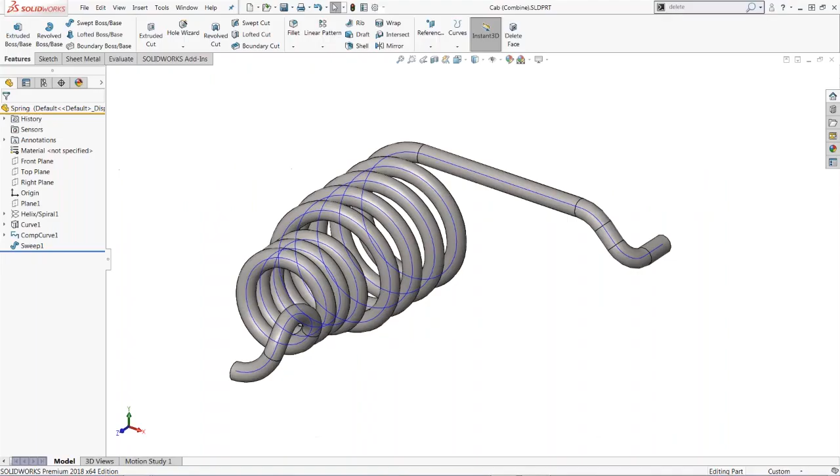With this next command, you can add, subtract, or intersect bodies. George Boole would be proud, founder of Boolean algebra. This is the Combine command, very useful when you're working with tool bodies or multiple bodies, or when you run into a scenario like I had here.

If I take a quick section view, what you'll find is that I created a shell that I only wanted to affect the top of the little roof that I have here, but it actually affected the whole body. So how did I get around that?

Well, first I created a split feature and placed it before the shell, which split the part into two separate bodies so the shell feature only affected the upper body. But then I ran into another issue, because now these are two separate bodies, and the way I had intended this to be designed was as a single one. You can see two solid bodies up here. So how do I get these to combine into one solid body?

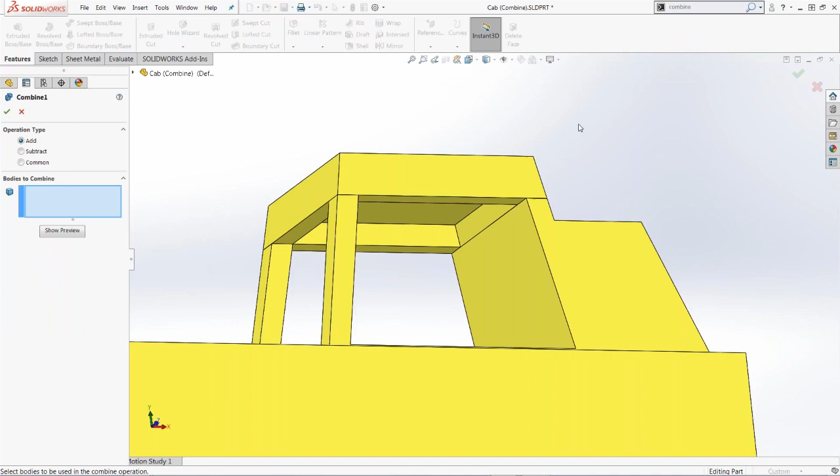Well, there's the Combine tool. I like to search for this one, just another example of where you can leverage these search commands. We can combine those. This is going to be an add operation type, so we just choose these two bodies and it'll combine them together, provided they're either intersecting or at least touching.

Subtract is really good for tool bodies, to subtract one body from another, and then Common will take only the intersecting resulting volume of two bodies. So with a quick add, I'm able to combine those back together, and you can see now we only have one solid body, and our shell feature is still intact. So that's Combine, very, very useful, especially for advanced part modeling.

And then the very last command I'd like to share with you today: the ability to turn multi-body parts into discrete part files with this powerful command.

There's two ways to do this. I'm going to show save bodies. That's my favorite. You can also use insert into new part. I encourage you to research the differences between the two, but we're going to show the save bodies command.

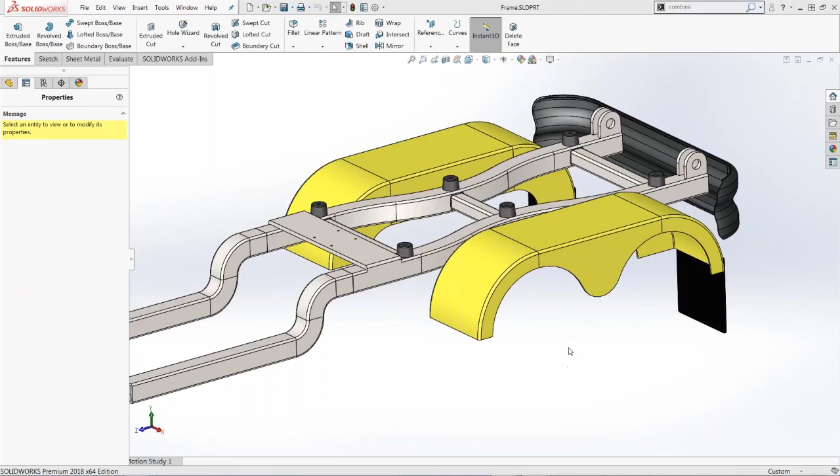Now, I've opened up the frame of the dump truck here, and I built this as a multiple body part, known as a multi-body. So if, for example, I wanted to take just these fenders and I wanted to save those out so that I could continue working on them without working in this entire frame model, how would I do that? This is very commonly asked, and fortunately, it's very simple to do.

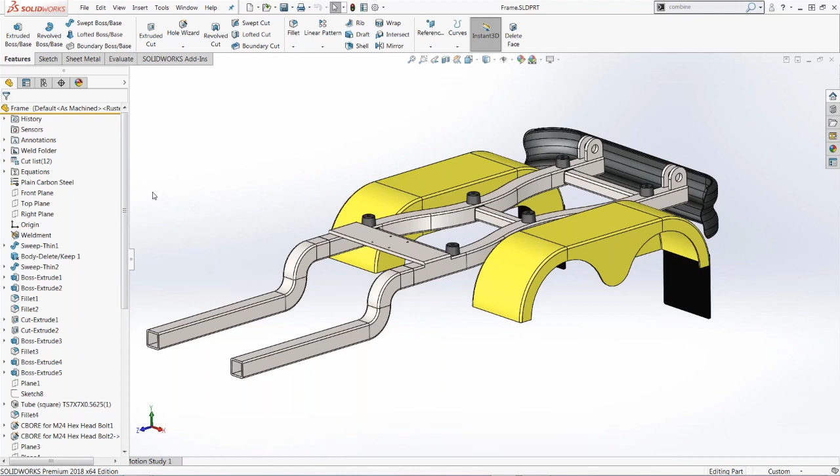Whether you're using a cut list, like I am in my case, or if you have a solid bodies folder, a simple right click of that folder will allow you to choose Save Bodies. And this command's very simple. You just have to click the bodies that you want to save. Here's the first fender, there's the second fender, and then at the bottom here, you'll see there's my new file name. So it's automatically assigning a file name.

If you double click this, you can go ahead and save these out. So we'll do fender 1. Let's try a different number here. Fender 3. And we'll do fender 4.

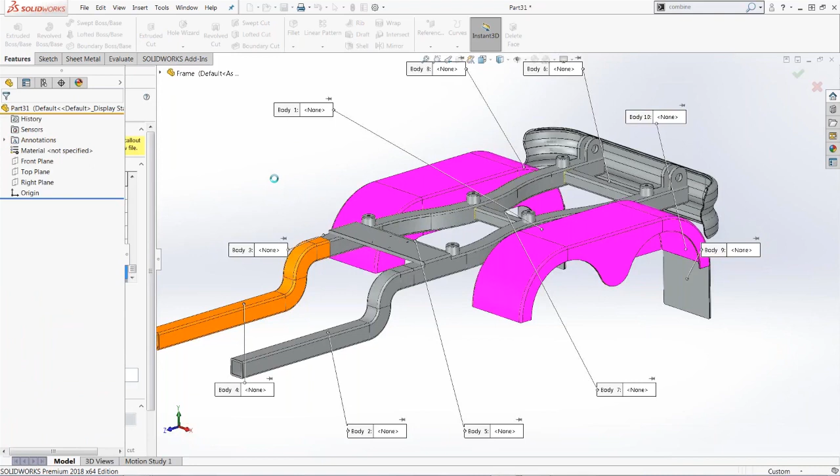And you can also propagate visual properties too, if you want it to have that same color. And you can also automate an assembly from this as well. We're going to keep it simple. I just want to save those bodies out. Once we've given those a directory and gave them a name, go ahead and click OK. And in just a second, we will be able to see that we have individual part files that are discrete.

And here we can propagate the visual properties. Let's go ahead and let these load up. It may take just a second here. All right, and then if we go check our parts, there's our fender 4. A quick rebuild will take care of that background issue. And then we have fender 3. All right, so we now have 2 unique part files that live on the system.

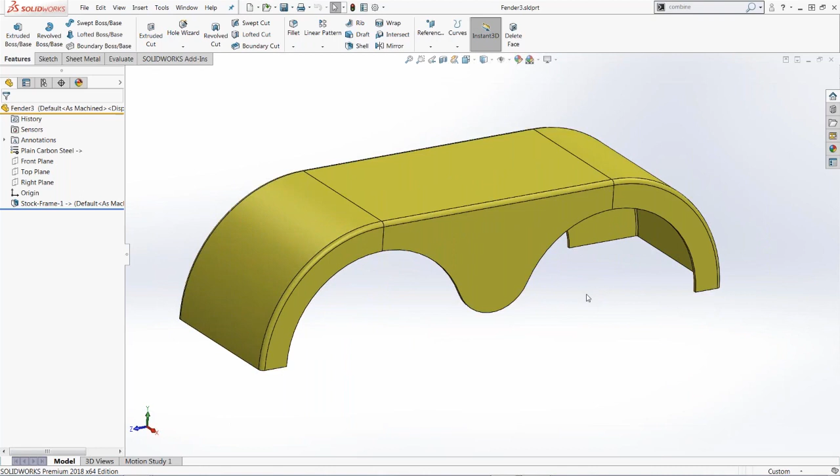Notice in the FeatureManager design tree, there is a right-facing arrow that indicates an external reference or an in-context relation. So changes that we make to that frame, the initial part that we had open, will propagate here if we modify the fender there, but we can continue adding additional features and making modifications at this level as well, and this can be added to assemblies independently of the rest of the frame. All right, so very popular, very powerful command, and that is the save bodies command.

So the way to deal with this is in the Hole Wizard command, near the feature scope group box at probably the very bottom. In fact, you know what, I may be able to show this real quick. Let me go ahead and see if I can get my dump truck open, because I think this would be better to show. It shouldn't take more than a couple seconds here. Let me get this loaded up. A couple more seconds here.

All right. So let's say, for example, I wanted to put some holes in the tailgate, right? If I go straight into assembly and I go to my assembly features, you do have an option to create a Hole Wizard feature. But what you'll notice is that under feature scope at the very bottom of the property manager, by default, this checkbox will be empty. So propagate feature to parts. That's what you want to make sure to check on if you want to create this Hole Wizard feature and actually have it go all the way down to the component.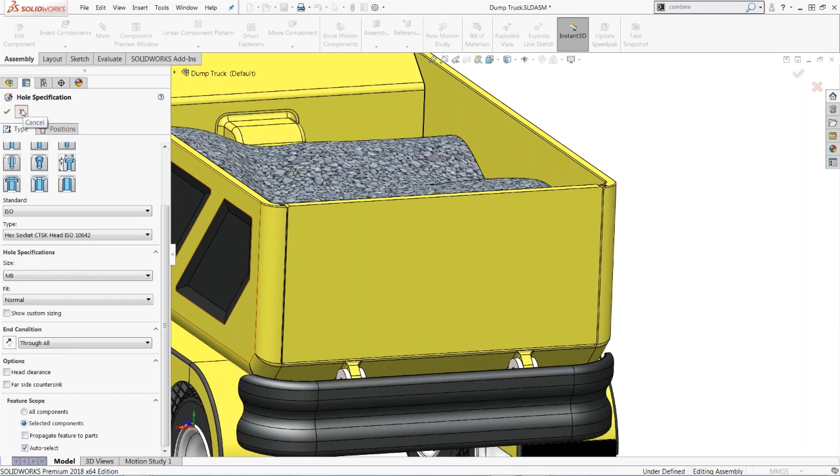The other way to do this that gets a little bit more involved is to take the component and edit the component in context. You can click it and choose Edit Component in the Assembly tab, and now you can use a standard Hole Wizard feature just like normal, and it should apply those at the component level as well. All right, so hopefully that helps. Just keep those in mind, and that should get you on the right track. Good question, Connie. Thank you.

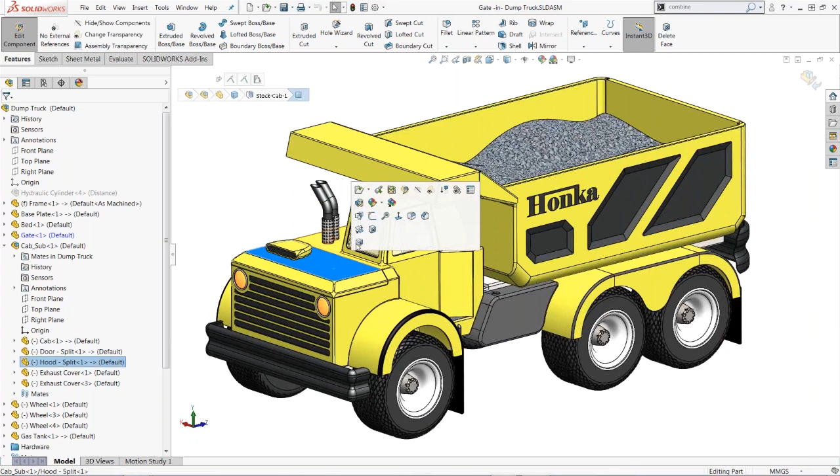Interesting question from Nicholas. In the linear pattern tool, is it possible to pattern in both directions? As an example, a center point and making a linear pattern in 4 directions. 4 directions at once, I don't know about that. Let me open up an example part here. We'll put a couple holes in this guy. Let's just do a real simple through cut.

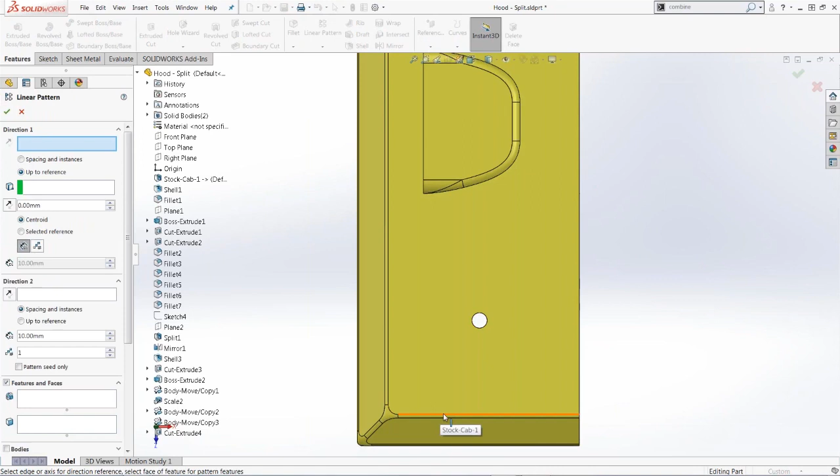You can pattern in 2 directions. So I'll show you an example of kind of how I would go about that. Let's go ahead and just get a through all hole here. And if we go over to our linear pattern, you can pattern in 2 directions. So I'll go in the X direction, and then we'll go in the Z direction in this case. Let's grab our feature here, just a simple hole.

So you can create a 2-directional array. Just do a simple example with spacing and instances. So we create something like this. And then for direction 2, same idea. So that's your most basic 2-directional pattern.

If you wanted to go in the opposite direction, you can do something like this. So for direction 2, you can choose another reference that just has the same direction, the same orientation, or you could even choose the identical reference and then just reverse it. All right, so it'll do that. If you choose to do this, by the way, make sure that you're only patterning the seed. Otherwise, you're patterning the results of the first direction, which can cause some issues.

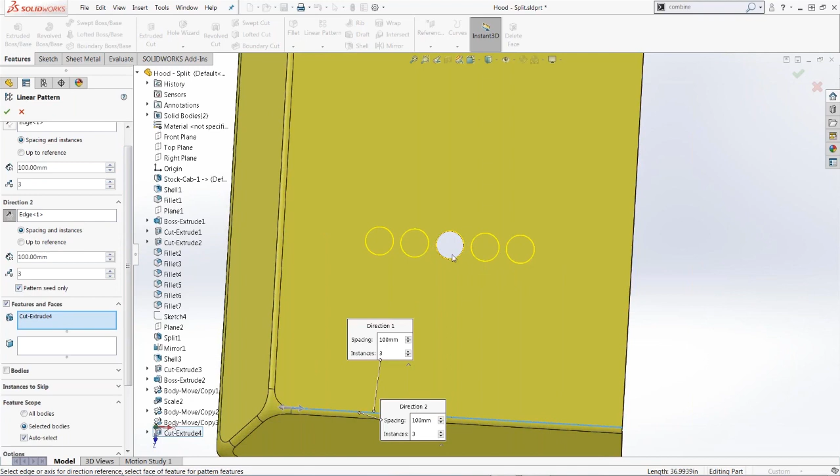So you can get a pattern like this. And then what I would say from here, if you wanted to go in 4 directions, I would start off with a pattern like this, confirm that. And then what you can do is you can use a second pattern. And then for direction 1 and direction 2, again, we're going in the same direction, just reversed. Make sure to pattern the seed only, and then I would choose instances to skip.

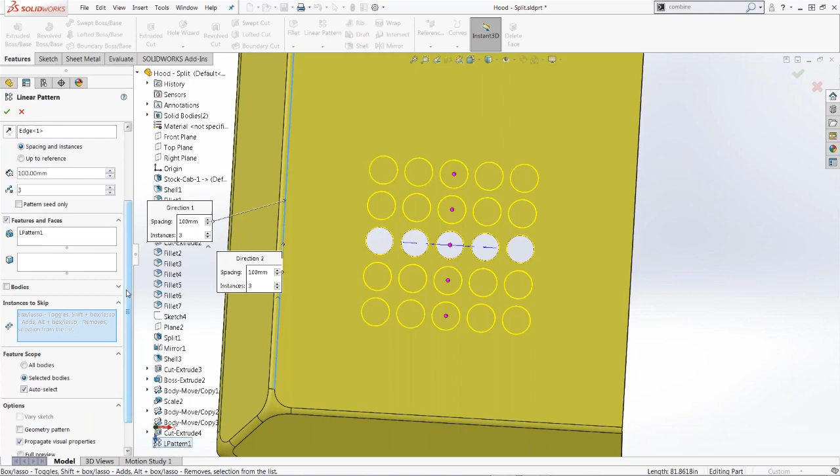So I'm assuming you're trying to get like a plus sign or something like that, you can skip some of those instances and try to make that work. But your mileage may vary with that. So just be aware, you may have to use a combination of multiple pattern features in order to get that to work. But good question. I hope that gets you on the right track there.

Is it possible to rebuild everything from child to parent, both the model and the drawing, in one command? If I'm understanding your question correctly, a rebuild of the part that you're documenting should update the drawing automatically. So let's create a drawing from this real quick. I'm wondering, because I'm sure that you've tried it before.

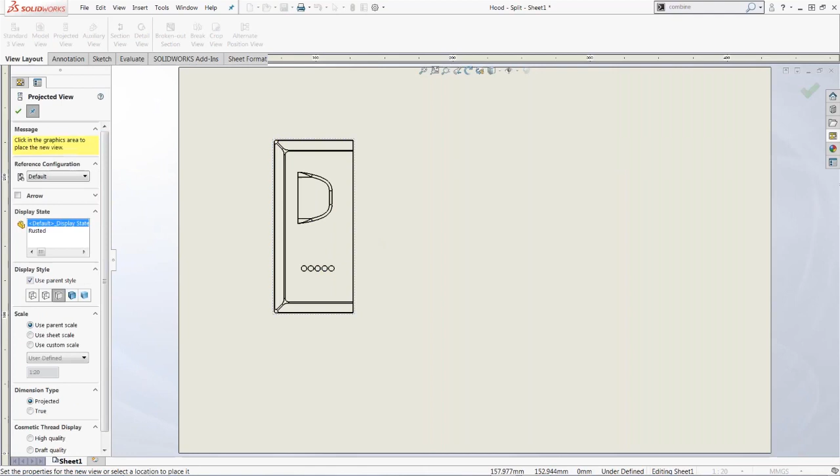Let's go ahead and get our drawing view in here. So there's my drawing view. We'd do a projected view. And let's say I go back to my SolidWorks part and I get rid of my linear pattern, right? So now we just have one hole in the hood. When I rebuild this and I come back to the drawing, it should automatically update.

So if you're not seeing something like this, if you're lacking that associativity, there may be an issue with references between the parts that you're using and the drawing. So that might be something, again, tech support might be able to help you out there, but just make sure that you're actually using and have the parts open that are represented in your drawing. Because if you don't have this associativity, then that means that there's something else going on. I hope that answers your question, but let me know if it doesn't, Edmund.

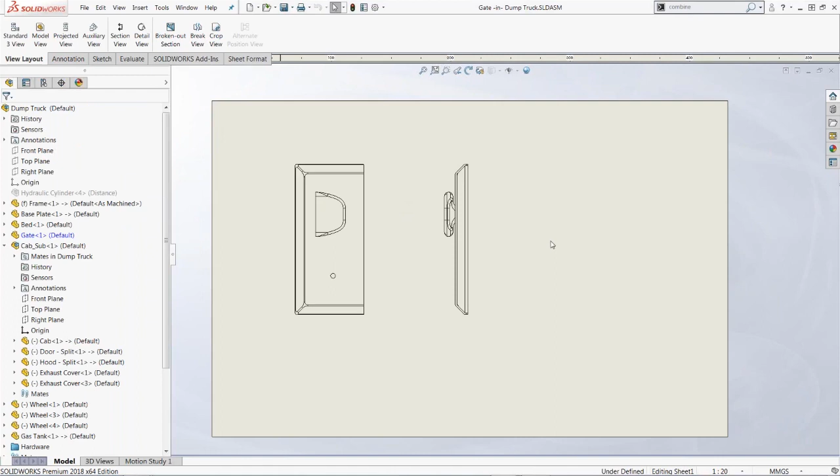Nathan, thank you for the suggestion. Going back to creating a hole in assembly, it's also worth noting that you may only be creating a hole through certain bodies, but not all of them. Once again, that can be controlled by feature scope. So, for example, if I wanted a hole wizard hole on the back here, you may by default be going, say, through the entire assembly, or on the other hand, you may only be going through one component when you need multiple components. And the way to deal with this is through the use of feature scope.

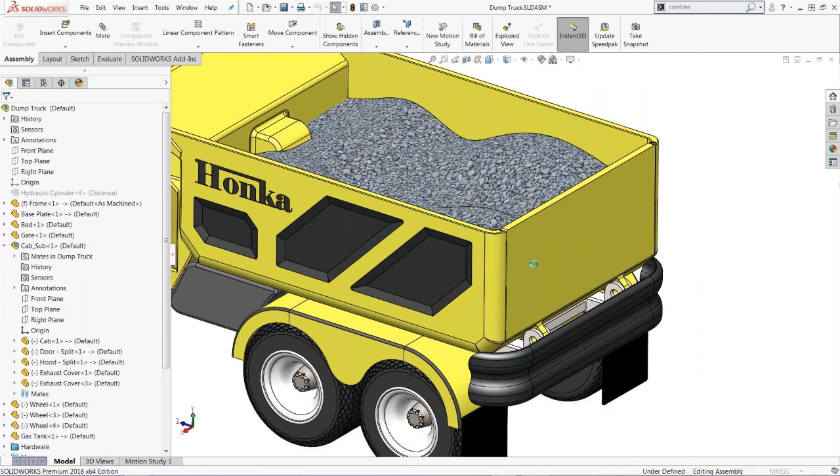So in the assembly tab here, when I go to create my hole wizard feature, at the bottom you have feature scope. This controls which components are going to be affected by the hole. You can choose all components. By default, it's going to be selected components with auto select on, which will choose all visible components. But if you disable auto select, you can choose which components are going to be affected by the feature that you're creating. So feature scope is very valuable. I highly recommend getting familiar with it because you can build a lot of intelligence and have a lot of flexibility when you leverage those options.

Ken has, let's see, "I have a multi-body part and I have saved the multi-bodies and then created an assembly out of them." He's then making a copy of that assembly and everything included in it as a backup. But the backup then maintains the reference to the original file instead of the backup.

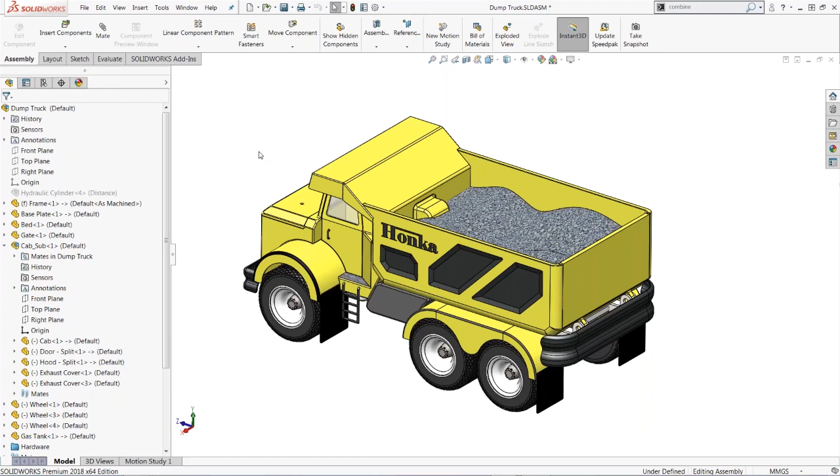Ken, this is an excellent question, and unfortunately there's no very easy way for me to show you how to deal with that. This involves taking care of external references and actually stripping them out and recreating them for your backup there. That's something that we teach in our assemblies course. Unfortunately, that's a little bit too in-depth for me to go into right now.

But basically what you can do is you can take all those in-context references, and if you remember when I showed sketches, let me get back into a sketch here real quick. Let's find a good one. When you edit a sketch, if you go to display delete relations, you can look for defined in context or external. These are the relations that you would need to take care of at the sketch level to help you essentially rebuild those relationships. But you may also need to do this with features too.

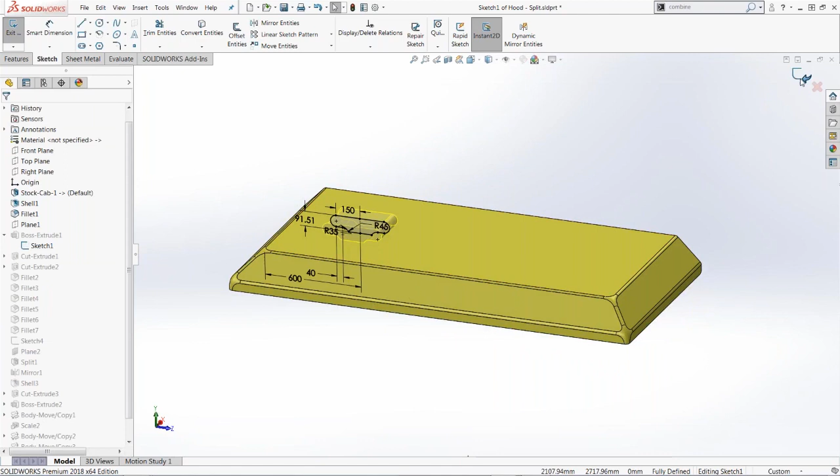It may not be specific to just sketches. Things like end conditions, up to references, etc. Unfortunately, there is a little bit of manual labor that's required to deal with those, but hopefully you get the idea. It sounds like it might just be a little bit of work. That may be something that we can assist with, but I can't guarantee. It really just depends on the nature of the work.

Good question in from Edmund. What is the difference between a configuration and a derived configuration? In what situation should I use one versus the other? Fortunately, this is a pretty easy concept, but as far as when you should use one versus the other, it really depends. Basically what this does is it allows you to create a configuration that is a child of an existing configuration. So if I add a derived configuration, and I'll call this derived, we now have our default and we have a derived configuration.

I'm sure you've seen this before. You've probably seen this in Weldments before. Basically what this means is that anytime I change the parent configuration, the default configuration, those changes are applied to derived. So for the default configuration, maybe I want to suppress, we'll just suppress our hole. We'll keep it really simple here. If I suppress that in the default configuration, it's going to be suppressed in the derived configuration. But this is a one-way street.

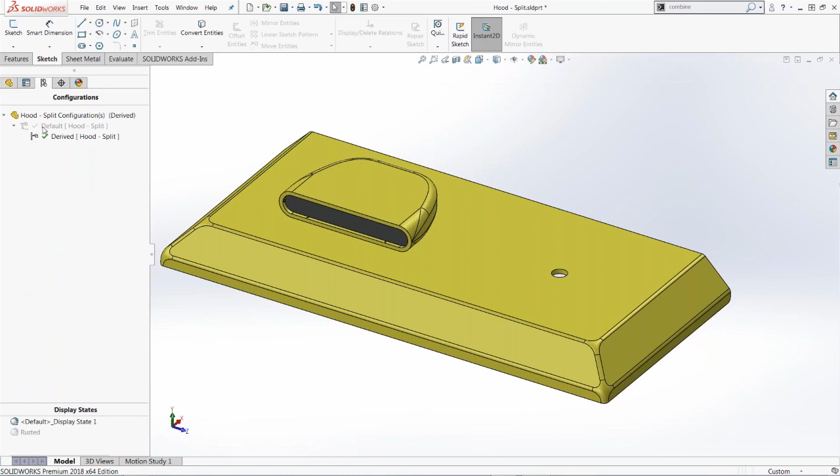So if I change this in the derived configuration, if I unsuppress that and go back to default, notice it's still suppressed. So anything you do to the original is going to be reflected in the derived, but not vice versa. So that's what that is.